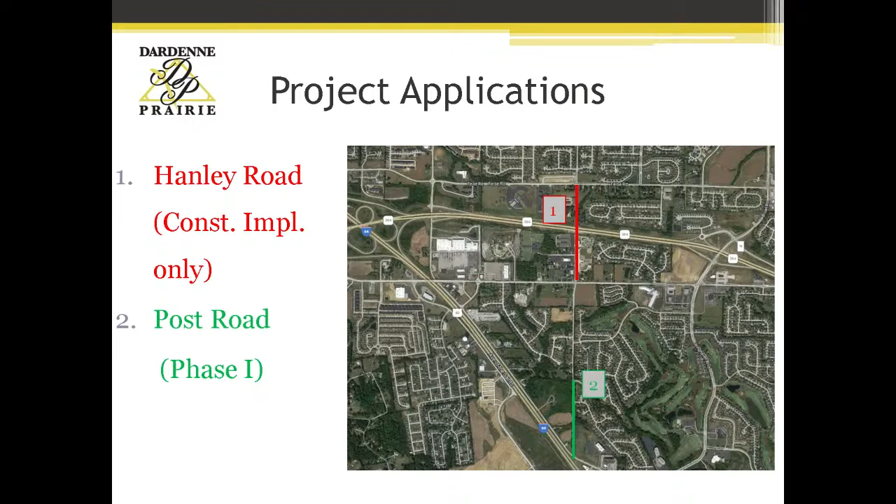Everybody hear me okay? So we submitted 2 applications: Hanley Road, just for construction implementation only, as suggested by the road board staff, county staff, and Post Road. Hanley Road is worn out. We're asking to do a mill and overlay restriping, and we're asking for construction money only.

The city's been authorized by St. Charles County to start the engineering, which is going to commence soon. It's right in front of City Hall. This stretch goes under the bridge there and crosses over or under 364.

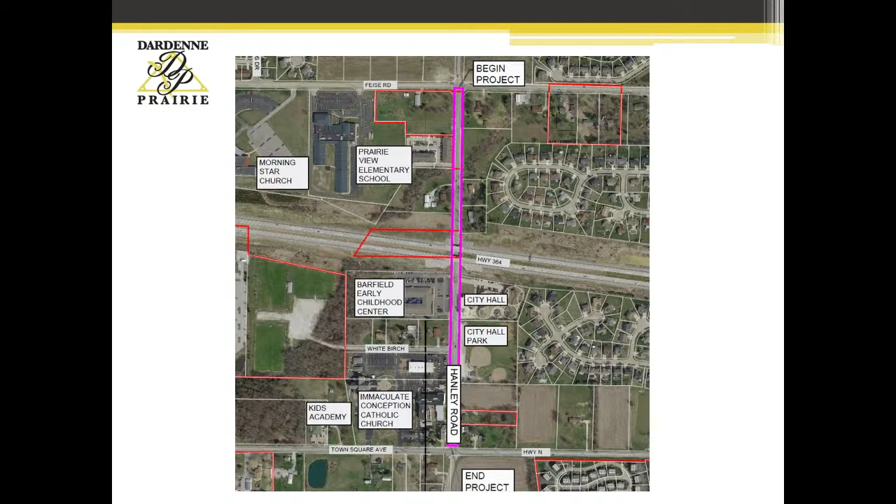I think it's busier than the ADT shows, but it's a very busy connection between Old Highway N, Town Square, and Feise Road, and many of you have traveled that area. It's very nice, but the condition of the pavement has deteriorated. We have City Hall Park, ICC Church, Wentzville School District Early Childhood Center, and Prairie View Elementary around the corner. So there's a lot of facilities, and it's a nice connection road. The condition, obviously, doesn't get better over time.

So we're here to share that with you. Again, mill overlay, we would plan on using fiber in most of our asphalt, which Weis Design Group has been using recently on our projects. It's been a proven quantity and it is holding up much better than standard asphalt. We believe it's well worth it.

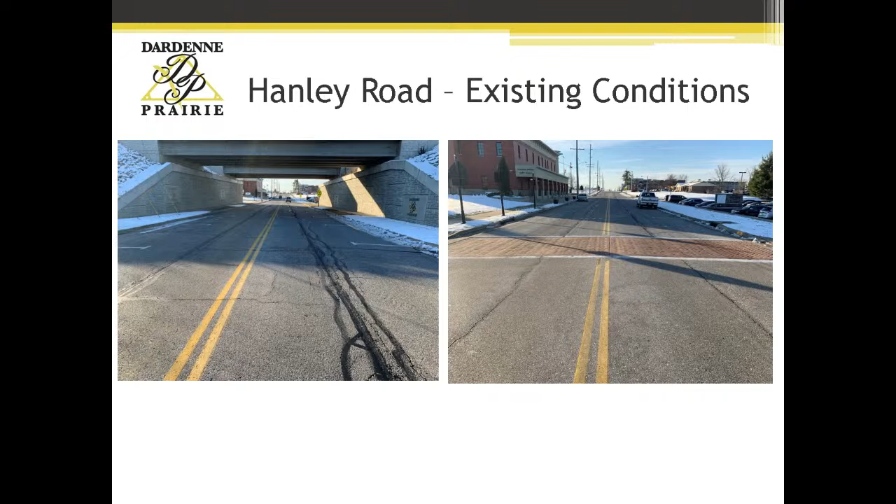So that was in the original grant that we applied for to East West Gateway for the construction funds. That would be part of this, hopefully to keep or prevent the cracks from coming back as quickly as possible. Obviously we can't control the base with the money we're asking for construction, but we can certainly help with control of cracking with the surface.

Share the road signs, try to upgrade that. The concrete is not damaged very much. We want to catch it before it gets to that point.

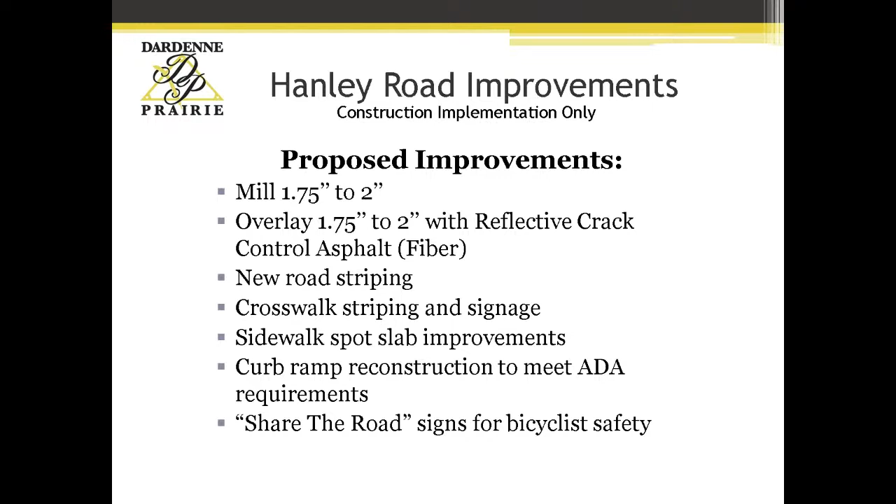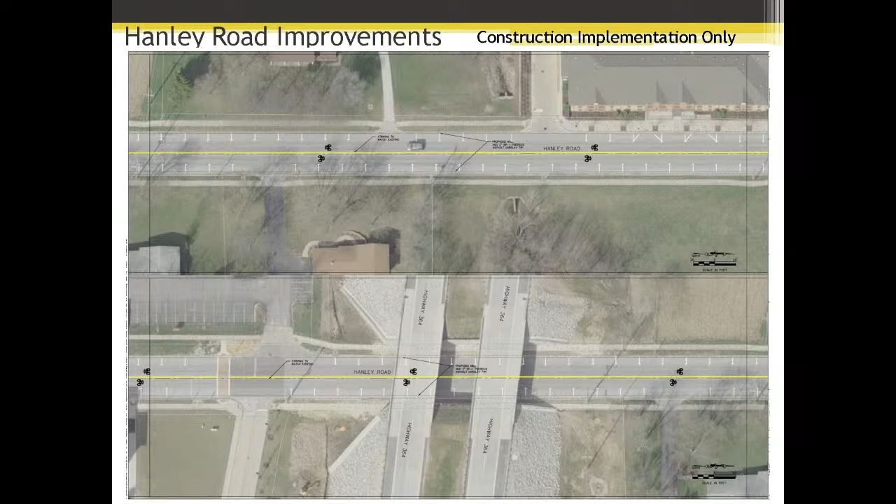ADA accessibility has already been built into the project under previous construction. So again, it's a mill and overlay, restriping, and basically reestablishing, putting some bike markings on there, and reestablishing good pavement. To the north, we have New Hanley Road that has been constructed and recently completed with STP and road board money. So now we will have a good connection from north of Feise all the way down to Town Square.

In this case, I have before the council tonight - I leave here and go to the Dardenne Prairie City meeting - and we're going to discuss and get approval, at least a consensus approval, to change from... because we were not awarded the federal grant, working with county staff we've amended the request to show there is no federal participation in this, and that the city now is going to have to increase their match, quite a bit actually, up to 20%. I expect a positive result from the council tonight.

But obviously we'll share that with staff as of tomorrow morning. And then from there, based on your decision, if you allow us to proceed under this manner, I'm sure there'll be a formal agreement that will be voted on by the city board.

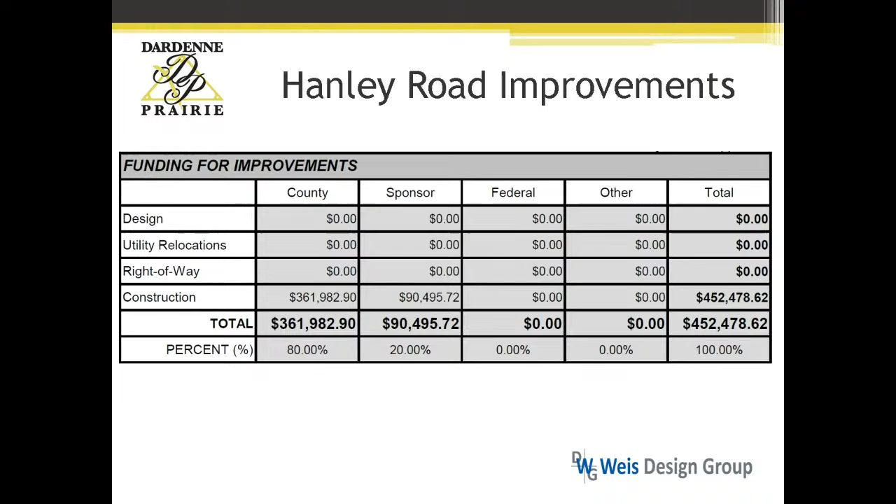Post Road - quite a bit more of a problem. Many of you, I'm sure, have driven this connection.

Last year we asked for the whole amount. This year, and we were tentatively awarded based on East West Gateway approval, the first phase - basically halfway, just short of halfway, to the second Post Valley entrance.

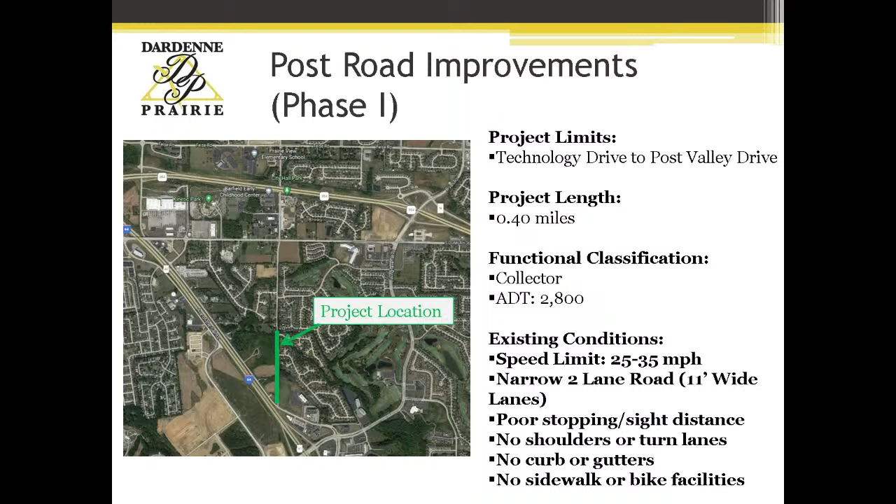Keep in mind, this road - the residents on the right side of where the project location arrow is are City of O'Fallon residents. So the city is sponsoring this on behalf of Dardenne Prairie to help with this connection, a major connection. As of right now, we don't have participation from the City of O'Fallon, even though the eastern half of the road is their primary residence.

And it's the old style - no curb and gutter, no shoulders, no stormwater control, no bike pedestrian movement, some sight distance issues. That sight distance you see on the right will not be taken up until we get to phase 2, but this does show kind of the northern end of the project.

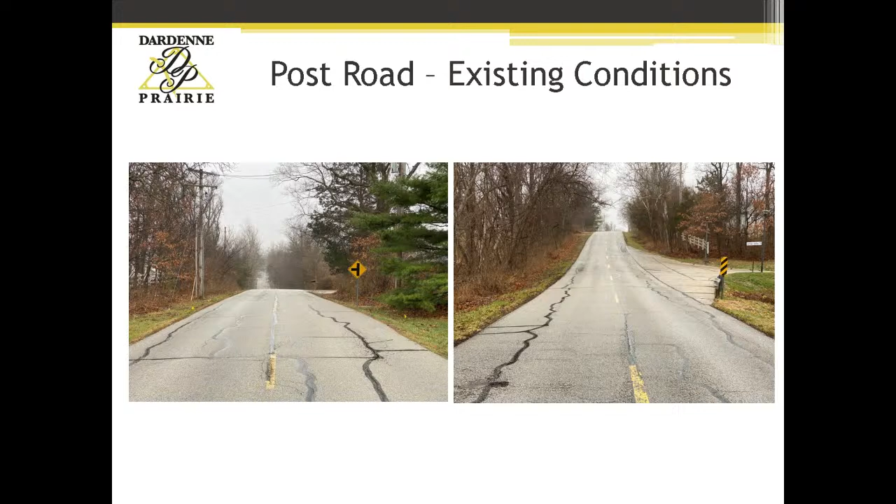The other big thing that we have is down at the bottom, you'll see a realigned intersection with Technology Drive. So we've submitted to MoDOT on behalf of the city, and they wrote a letter of support of the grant.

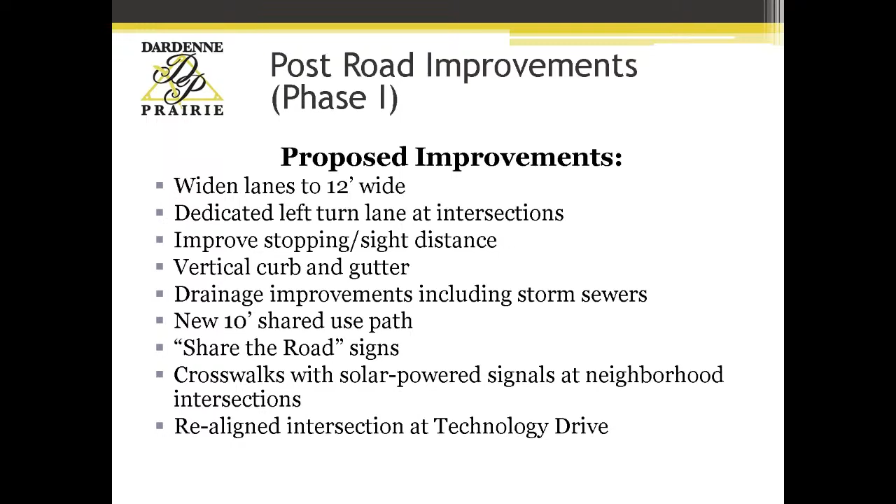We have a less than ideal turning movement, so if you're sitting on Post Road trying to get onto Technology, you're straining in both directions and basically looking behind you to see if cars are coming on Technology heading towards Bryan Road. I use it almost every day that I go to city meetings and daily to Dardenne Prairie because I live in Weldon Spring. It is very dangerous. So part of this project, the first phase, is to improve that.

And here's what I'm talking about. The existing road on the top part of this slide - Post Road comes in at probably about a 45-degree angle with Technology. Obviously, we're going to come in at a 90.

That requires, and we put some money in there for right-of-way. You never know exactly how much, but we took a hard look at how much we're going to have to acquire on this triangle to get this sweeping curve to realign with Post Road. So this is integral. Theoretically, MoDOT has looked at this.

Again, as you all know, these are concept plans. They are with thought. However, this alignment will be subject to approval because Technology Drive is a MoDOT road. But we have been in cooperation, and they support the project.

But this is a key component. And then, of course, running down, there's a new development being proposed as we speak on that corner, on the west side of that corner. A mixed-use type development, and so we've already asked them for their right-of-way of their portion, but their property really

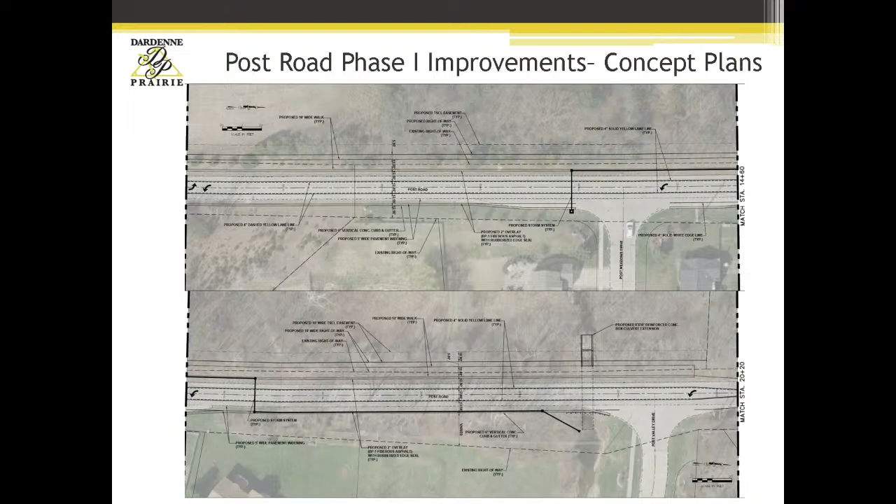But again, this is a key component of the first phase of this project. And we did line out storm sewers. We do have on the west side a 10-foot wide trail dedicated along the whole west side. In order to build that, we have an extension of a box culvert, which is, I guess there's a pointer on here, but if you can see that, it's

an extension of the box culvert in order to get everything, the lanes built and then the trail. And again, that's our stopping point. Where you saw that previous picture, where it starts to go up the hill, we'll have a temporary transition until phase 2 comes about. So that is our northern project limits.

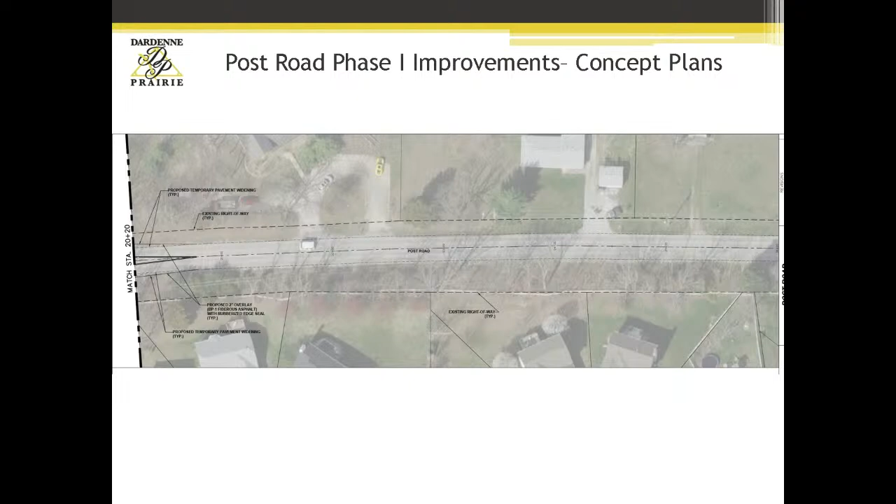This is the breakdown of the cost. Obviously, this project was on the list of approved or listed projects. So the federal share is involved. We asked for the most federal share that we felt where we would still be able to get the project started. This project is really a critical project for the area. There's a lot of danger in that curve, and it's another good connection.

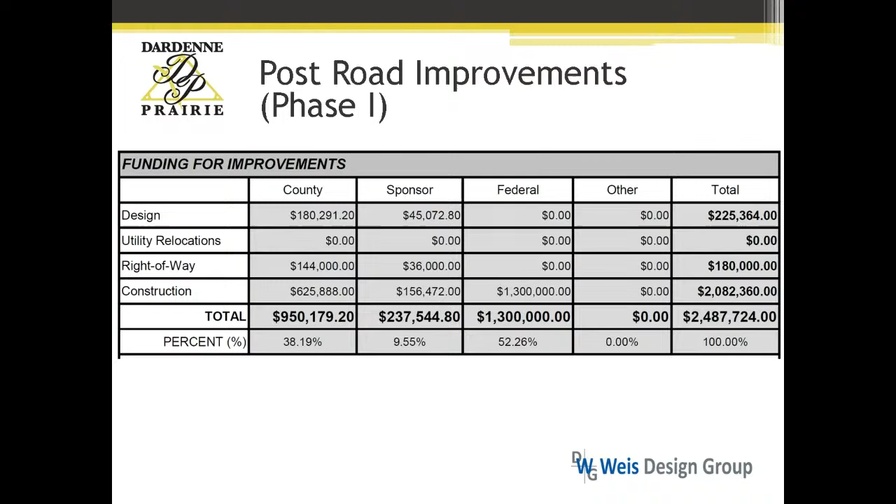Maybe alleviates some traffic off of Bryan Road, et cetera. So there's the share breakdown. And we were able to score good points because of this breakdown, and made the city understand that they were going to have to kick in more on this as well.

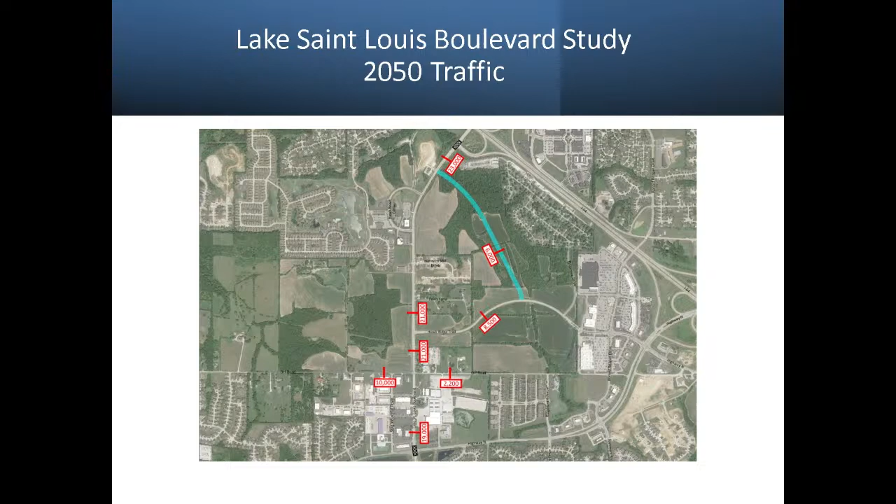We had a study done 2 years ago. They came back with a 2050 ADT of roughly 21,000 to 23,000 down Lake St. Louis Boulevard. And this is with a future connector. The green line is a future Hawk Ridge Trail extension. They suggested signals at these locations, possibly at the 2050 build out.

Initially probably would be the one at Fremont Road, which is the far north one, and then Orf Road at the farthest south.

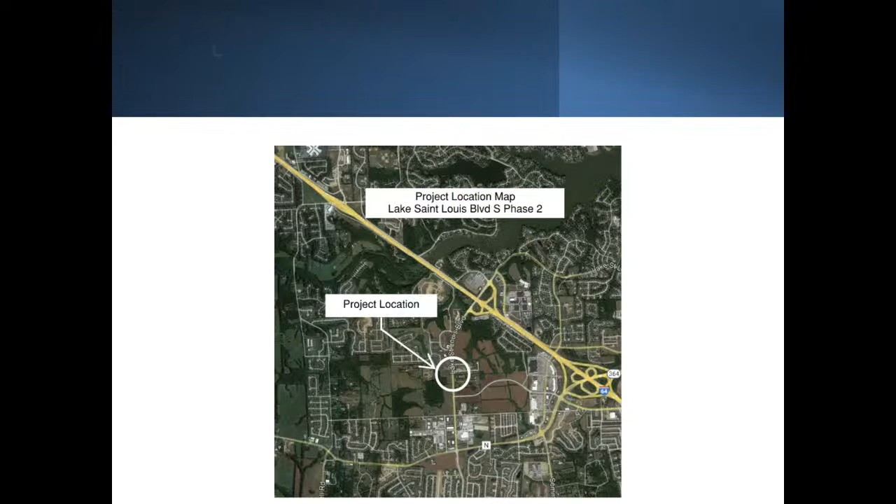Here's the project location for Phase 2. It's basically about a half mile of roadway. Last year, we applied for Phase 1, which goes from the highway to where this one starts. We were approved for both county and federal funding and MoDOT cost share on that project.

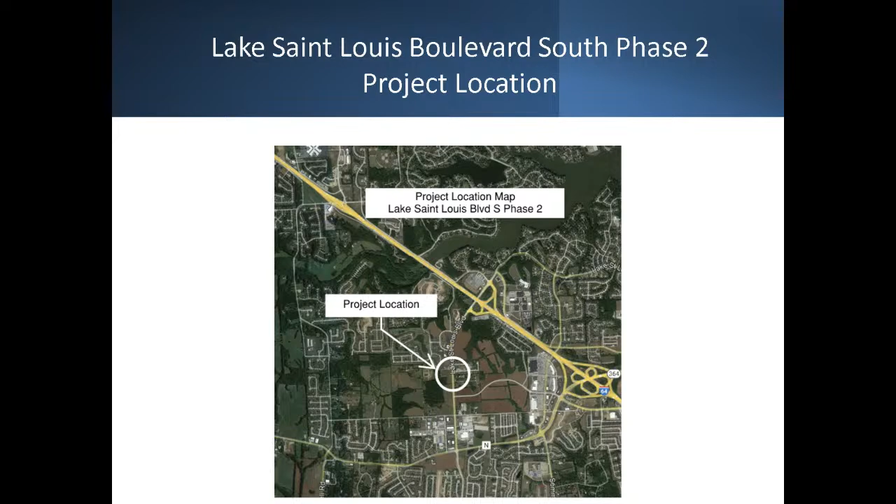So this is a continuation of that project. This is Phase 2. Phase 3 will take off at the bottom of the circle there and continue down pretty close to Highway N, where we'll have to figure out how to tie into the county's project probably when Highway N is upgraded.

The project's proposing adding, it's basically right now a 3-lane roadway, so 2 lanes with a center lane. The project's preserving a 5-lane ultimate corridor, providing bicycle and pedestrian facilities. That'd be a 6-foot sidewalk on the west side and a 10-foot bicycle facility on the east side, and then adding medians for traffic calming, and the speed through there is pretty high.

It's pretty wide open. The bike and pedestrian facilities will be placed at the point of the 5-lane build out, so they won't have to be reconstructed in the future. And the storm sewers will be built, I'll show you on the next phase kind of, but so that they can just be connected onto and extended out when the next 2 lanes come in the future.

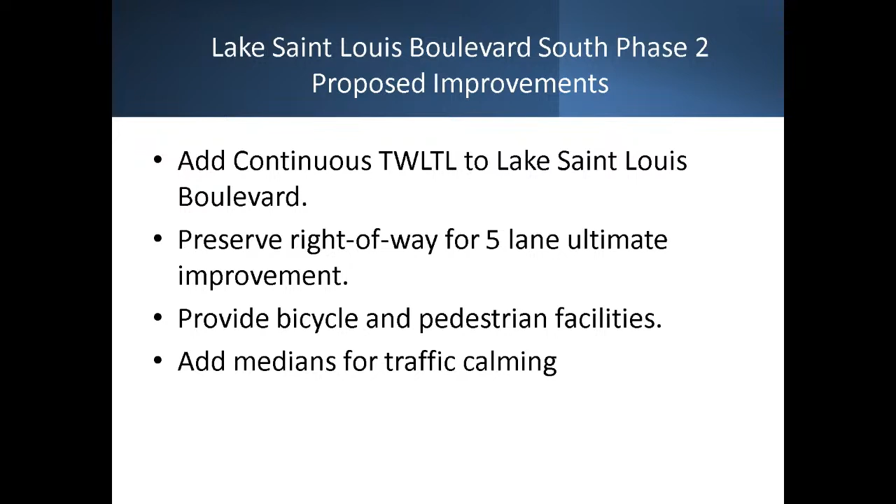Here's the beginning of the project. I can show you the 3 lanes, the 6-foot bike path on one side, the 10-foot on the other, continuing down. I've got green in the medians. Those locations are obviously dependent on the design engineer and need to facilitate access management.

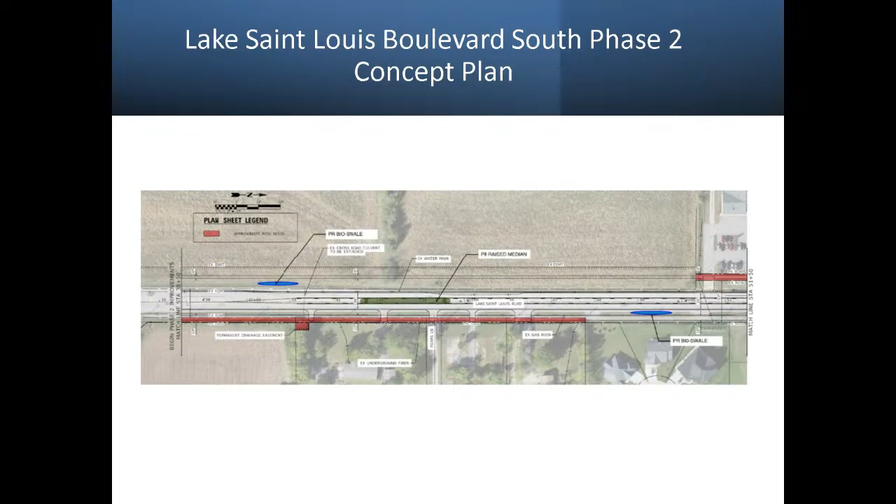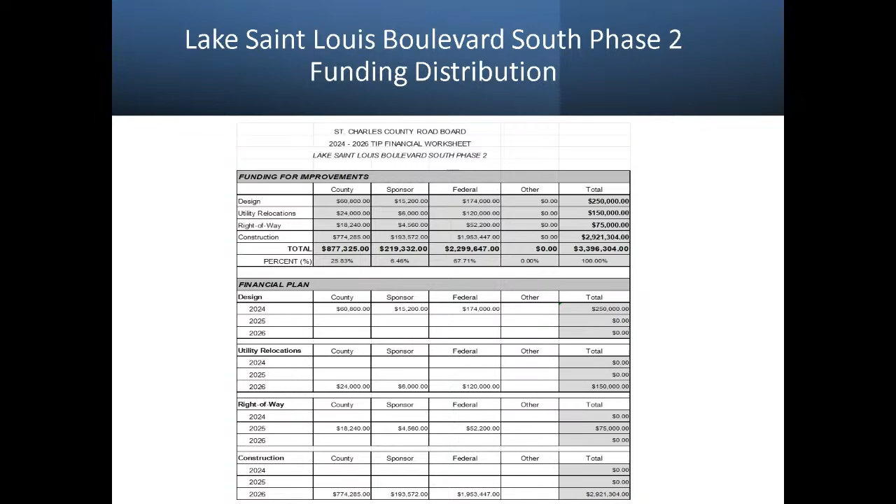Total cost for the project is approximately $3.4 million. We received $2.3 million in STP funding, or recommended funding. We requested $877,000 for the county road board and $220,000 for the city match portion. The breakdown is here with the years, which I covered in the last slide. Obviously the years will be dependent on the federal schedule, so they'll vary a little bit because of that.

The second project is the Orf Road Connector design, and the project location, you can see it there, is off between Hawk Ridge Trail and Orf Road.

I put this slide back on to show another piece of information. The bottom green line going left to right, that's Orf Road. It currently ends just to the right side of the bottom signal there. There's a line that goes up and then curves up, so it ends down there past the last development on your right. It's dead-ended, got dead-ended when they put Dierbergs in.

Part of this study suggested that the way this works with the traffic signal and the optimum traffic signal location is we needed to put in one of these connectors off of Orf Road, the bottom line left to right. The first line, which I believe is F, goes straight up, but we can't do that one because there's already development there. We can do one farther to the right, which is what I'm asking for here.

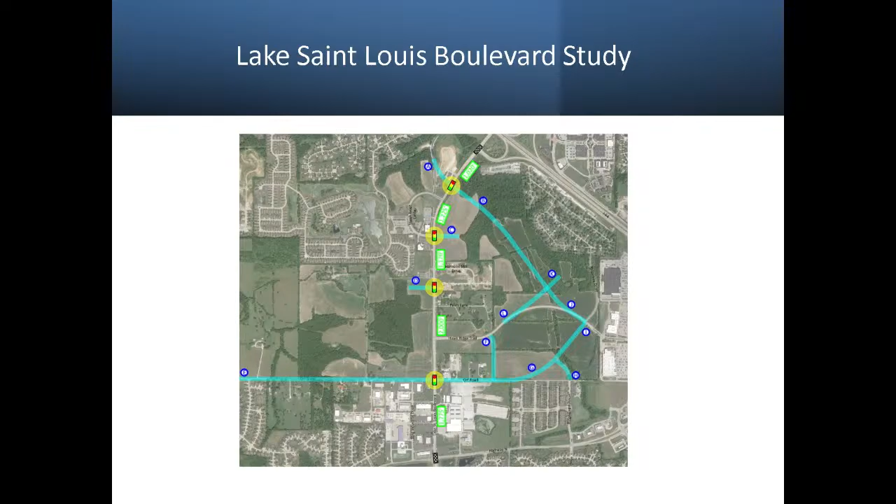So Orf Road, again, the bottom road is Orf Road. Here's what we're calling right now the Orf Road connector. We're just asking for the design funds on it right now, so we can apply for an application either next year or the year after. We can go ahead and start acquiring that right away.

I think this is getting ready to develop. We've had some interest in it. Everything to the west of this, to your left, has been developed. This is the only piece left between here and the shops. The only way we can get this in there actually makes sense really well, connecting Orf Road, and then to the south into Ridgeway Avenue, which then goes to Highway N.

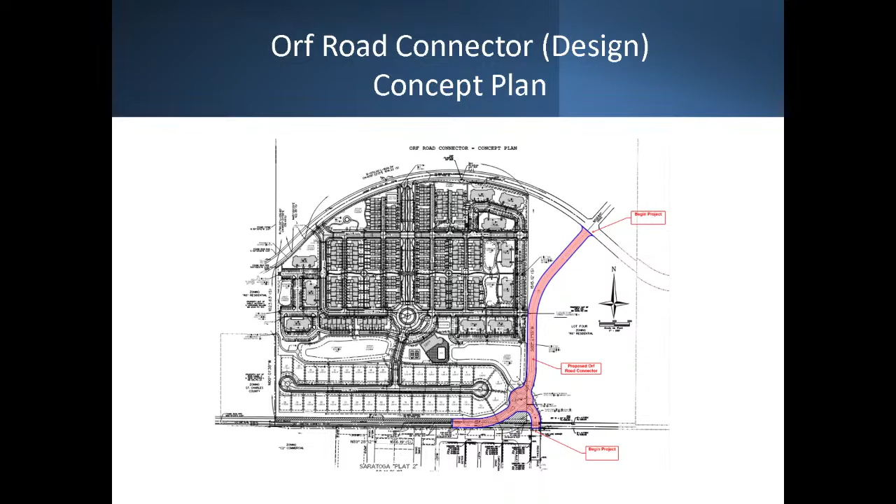Again, a little bit of a bigger picture here. The green line going up and to the left is the future Hawk Ridge extension, which is what we see being built out when that develops. The Orf Road connector, again, with the roundabout down here to tie Orf and the existing Orf Road together with a signal at Orf and Lake St. Louis Boulevard at the bottom left. That continues on Orf down to Duello Road.

I have to apply for a functional reclassification on this because the area in blue, the existing road, lost its classification when it was dead-ended. A new road doesn't have a classification, so I'm applying for this road to be converted to major collector status.

And so I'm doing that now. I've been on the phone with them. Actually, we think we're going to reduce Hawk Ridge Trail from a major to a minor collector, and make this the major collector, which will help us on future funding projects with the feds. So it increases our scoring a little bit, and it makes sense because this is going to be the next corridor.

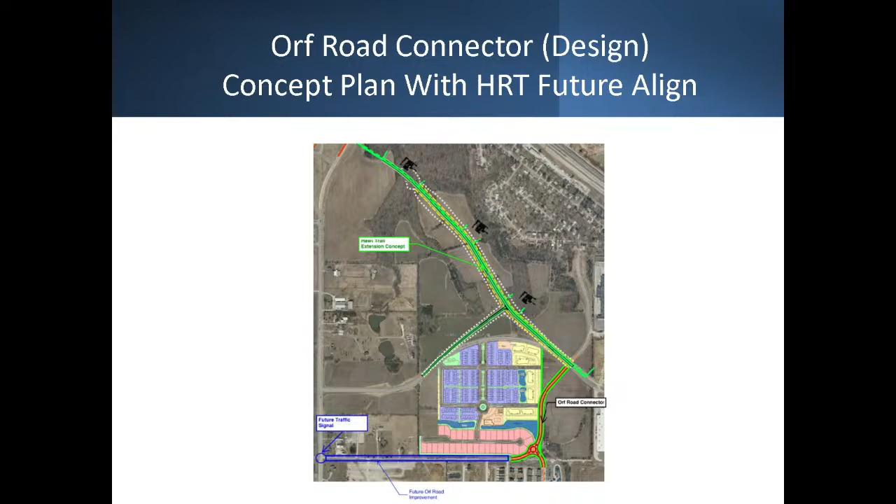So I'm reclassifying that, and planning on doing the Orf Road connector. Then we would phase in replacing Orf Road to Lake St. Louis Boulevard, and then working on it - it's probably going to be a two-stage phase project between Lake St., Louis Boulevard and Orf Road, or Duello Road, to improve Orf Road.

Design costs $200,000 to design the Orf Road connector. We were asking for an 80-20 split on that.

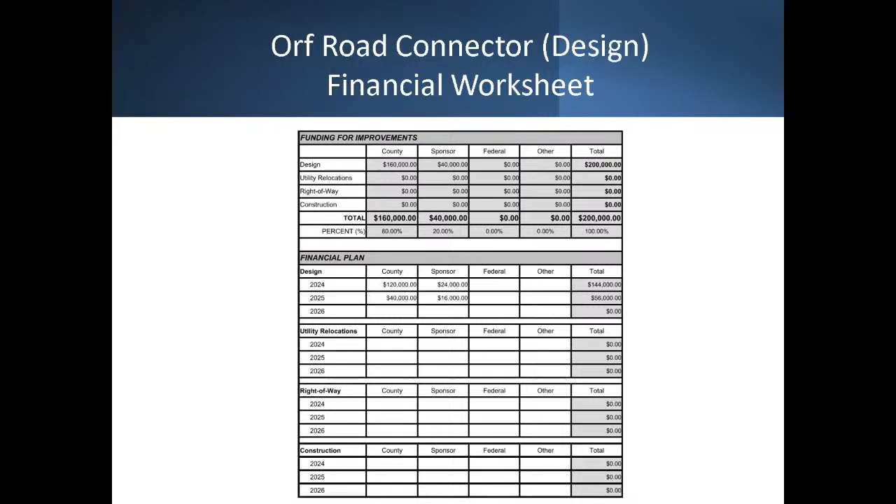That's what I have. Any questions?

The big thing on the design is the time frame. We're trying to keep things moving because Orf Road is getting busier. There's a lot of development going on down there, so we need to get on that corridor, because it's going to be at least a 4-year cycle of projects to be fundable.

Any questions? Thank you very much.

Move on to the City of New Melle.

Good afternoon, thank you for taking the time to listen to my project here. My name is Nathan Burley, I'm on behalf of the City of New Melle. We have one project we're presenting this afternoon.

It is the Foristell Road improvements. I'll explain throughout the slides why it says no trail there - we'll get to that. First, the project limits: we're going to start just a little northwest of the Veterans Foreign Wars property, and then go all the way to Foristell Road, or I'm sorry, Highway Z, approximately just a little over a mile.

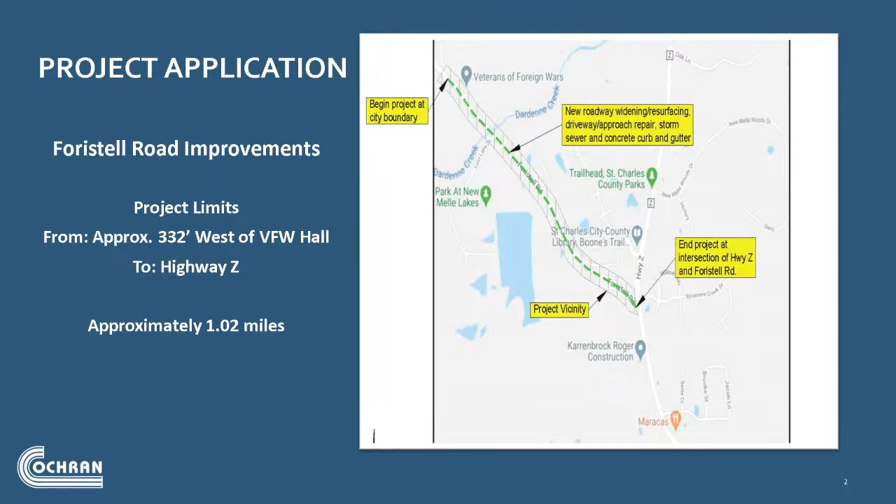So existing conditions of this road are pretty bad. There is very eroded and poor drainage on the side of the roadways. There are currently no shoulders of any kind except for a little stretch by a bridge crossing further down this road. Now there are no sidewalks.

However, we were able to obtain funding from East West Gateway recently for a 10-foot wide trail, which is why, after working with them and the county staff, we got to split these projects up to help us along. This would just be the second phase of it, sort of thing. So we're just presenting the roadway itself this time. The Paser rating is 3.25, so very, very bad condition here.

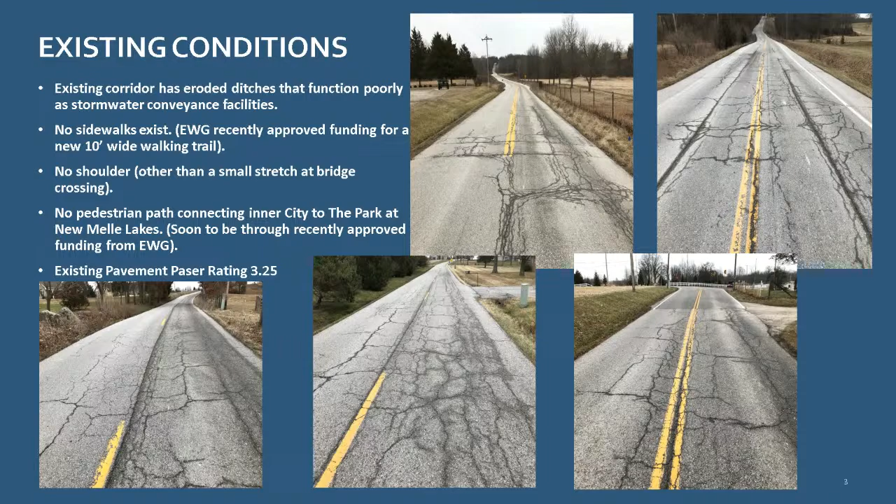Breaking this up into sections of improvements, we're starting by the VFW hall. We're going to pick up at the city boundary and resurface the road with asphalt, add some 2.5-foot wide curb and gutters through there, add a shoulder as well, and incorporate new storm pipes for any driveway crossings.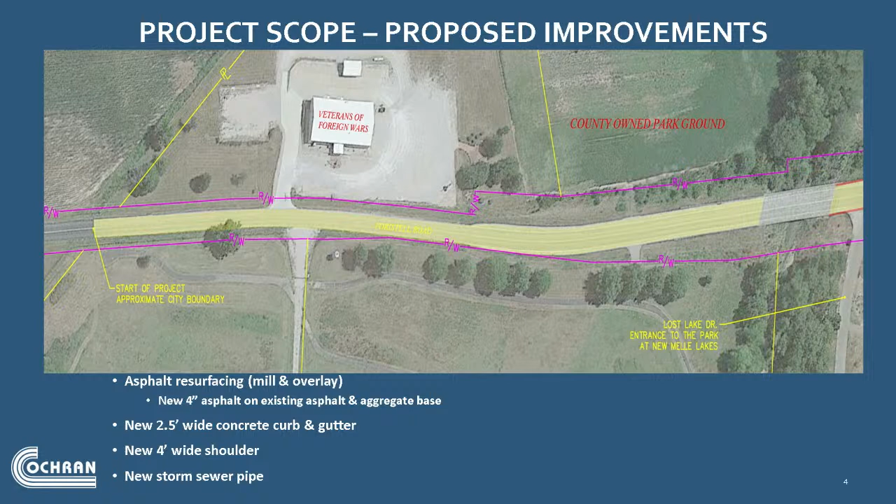Moving further up is more of the same, so we're going to widen the road out to make it uniform. I have typical sections coming up. Right now the existing lane widths are all over the place, so we want to make that uniform and get a good shoulder in there and some curb and gutter to help the water drainage, also incorporating new driveway approaches as needed, along with storm culverts that go underneath it.

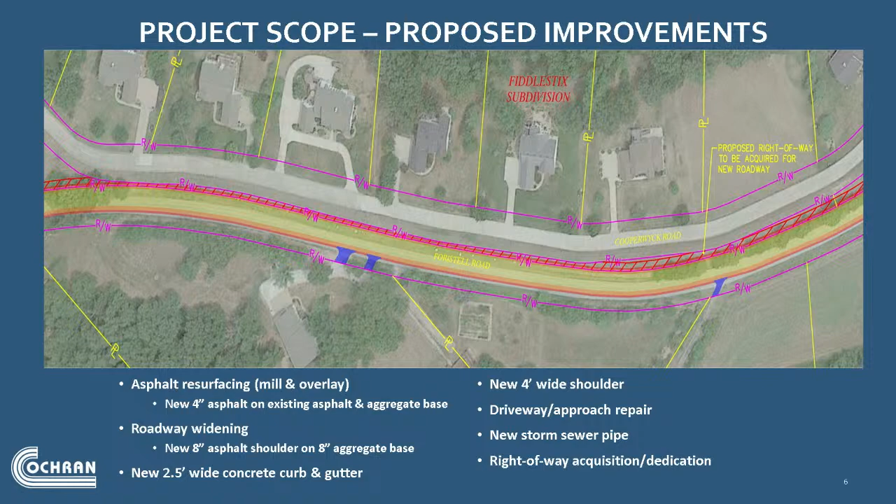Moving further along, we get close to the Fiddlestix subdivision, so there is some right-of-way dedication we will need to obtain in order to get this corridor through in a uniform manner. Again, we're widening the roadway and doing asphalt resurfacing, mill and overlay, and curb and gutter. Finally reaching Highway Z, it's more of the same: widening the road, curb and gutter, driveway approaches, things of that nature.

This is the typical sections. As you can see on the left, that's the existing conditions - roughly 11-foot wide lanes that vary all over the place. There is no shoulder, and the ditches are very eroded, causing poor drainage.

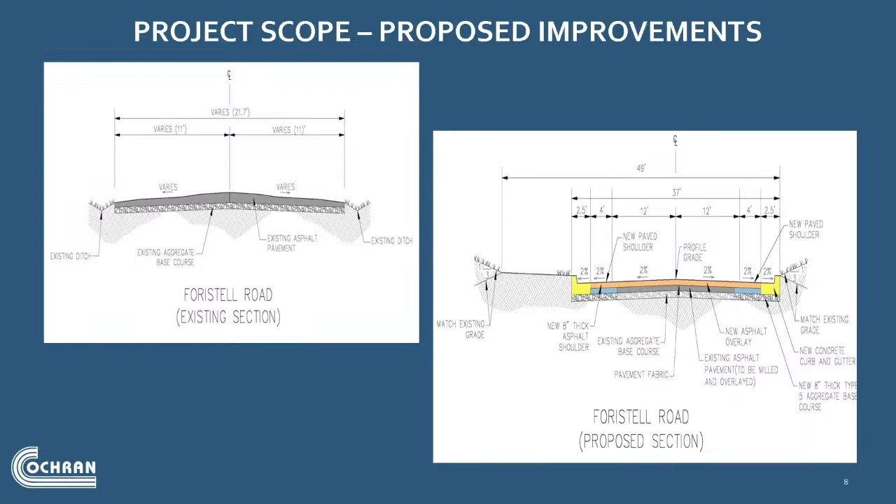On the right is our proposed design. We want to make them uniform 12-foot lanes all the way through and have some roadway separation between vehicles and pedestrians with a 4-foot wide shoulder and protection with a 2.5-foot wide curb and gutter. On the left here there's a big space - that's where the new proposed trail is going to go, right up against the back of the curb and gutter, but that's a separate project.

So performance measures here. Existing conditions is on the left there. Now at the bottom here, this is the overall goal, what the city is after, how they want it to look. This is actually from Weldon Spring. We did a project for them, similar to what we're trying to do for New Melle here.

The 10-foot wide trail was already approved, and then they're after the roadway there, how that looks with the 12-foot lanes, 4-foot shoulder, and the 2.5-foot curb and gutter. Really, they're after just healthier living and all-inclusive connectivity to the inner city and the county park that's actually at the end of Foristell Road here.

And they want just separation between motorists and pedestrians. Unfortunately, Foristell Road is heavily traveled by dump trucks from the quarry, which makes it very dangerous for pedestrians trying to get down to the county park, because there is no shoulder, no way for them to avoid walking on the side of the road. So we're trying to rectify that and get that cleaned up, and also improve the stormwater runoff and erosion hazards presented there currently.

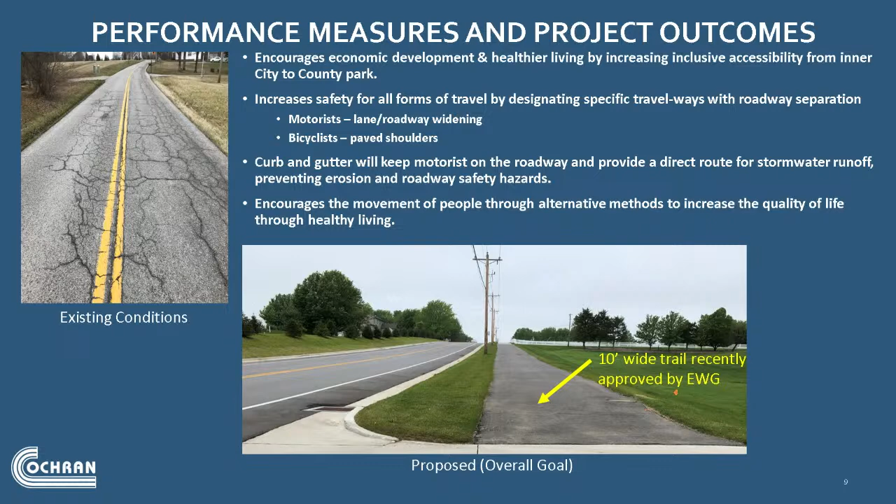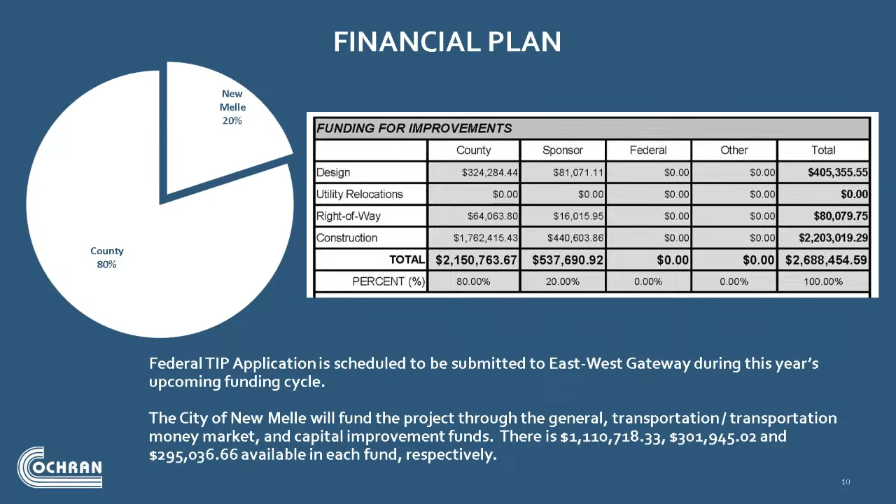For the financial plan, the cost breakdown is an 80-20 split. The overall project is a little over 2.6 million. So I'm requesting 2.1 million from the county, and the city will cover 537,000. For scheduling, we're set to start at the end of this year in October, with a completion date in March 2027 for construction.

So overall, we're looking for connectivity within the city and the park, and healthier living and safety overall. I appreciate your time. Do you guys have any questions?

Is the Parks Department going to develop the campground still? Yes, that is the plan. Do you have any timeline on that? No, I do not, not at this time.

Did you apply for federal funding for the road? We tried last round and did not receive it, so this round we are not. I know there's an upcoming one that opened at the end of April, so we're going to try for that.

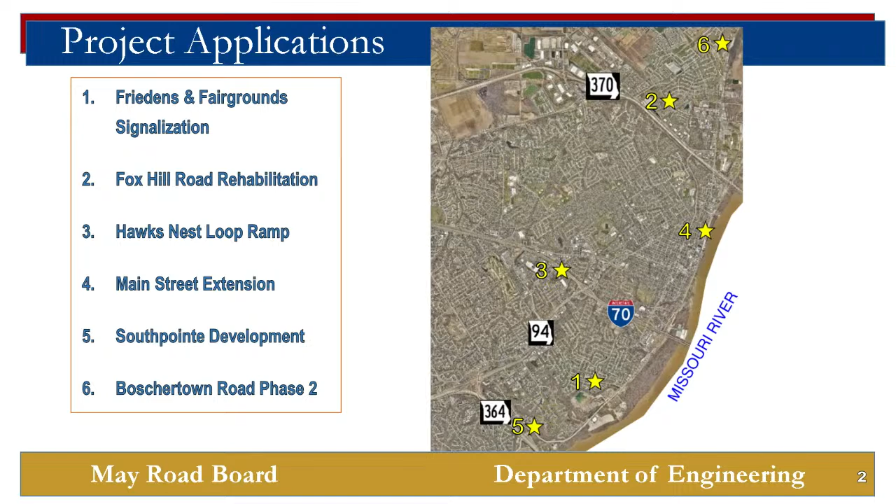The first project we wanted to talk about today is the one you heard a lot of speakers on. Before we get into the technical aspects, I wanted to take a step back and think about the guiding principles of the County Road Board. The projects we bring before you, the main goals are to support the state system and provide parallel routes to get folks efficiently between larger state routes within all the municipalities in St. Charles County, and in the process enhance development in all of our cities. Really, this project is the logical next step and result of us all doing a good job.

It's easy to look at this project and say, well, we connected Convention Center Boulevard, so now there's more traffic coming down the street, and that's definitely a huge part of it. But we're also rebuilding Highway 94 to get people more efficiently up near the Friedens Road end. We've reconstructed Arena Parkway, and we're in the process of designing and going to rebuild South Fifth Street. So there's all this successful road infrastructure supporting this increase in traffic, and unfortunately the increase in crashes corresponding to that, and also just a huge amount of development.

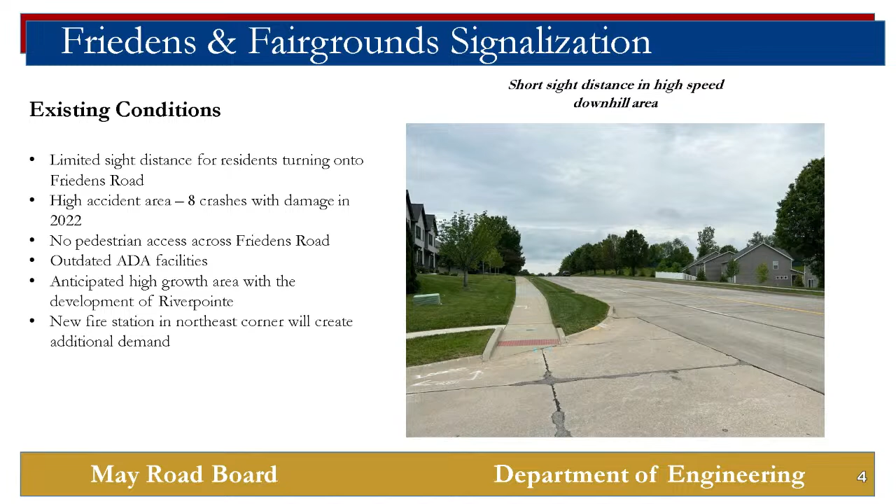So what's the solution for solving the issues you heard from several members of the public tonight? We think the solution is a signal. We've gone through the signal warrants, and it is a warranted signal based off of volumes and crashes experienced, and also the connectivity of the surrounding signal network.

One of the tricky things about this intersection is that it's a little harder than just adding traffic signals. It's a 4-lane road with no center turn lane today. So our first thought was to install a signal without touching the hardscape, but upon further consideration, we think there's significant risk of conflicting traffic movements if we leave a through and left turn lane combined.

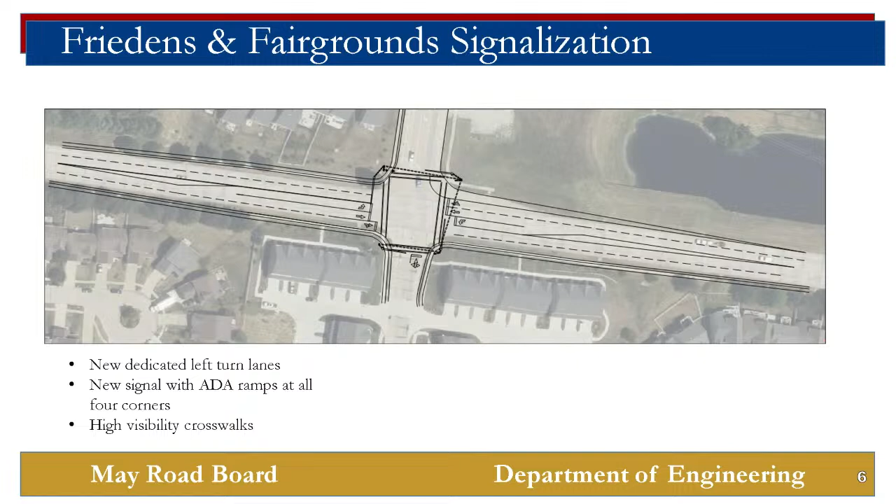What's the timeline on your fire station? It is scheduled to open the end of December of this year. There's actually a photo of it up here, of the construction underway. It's there.

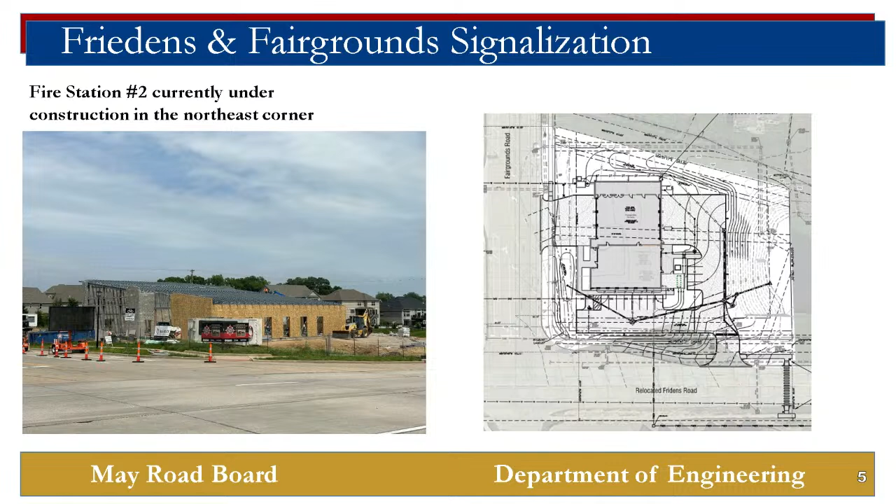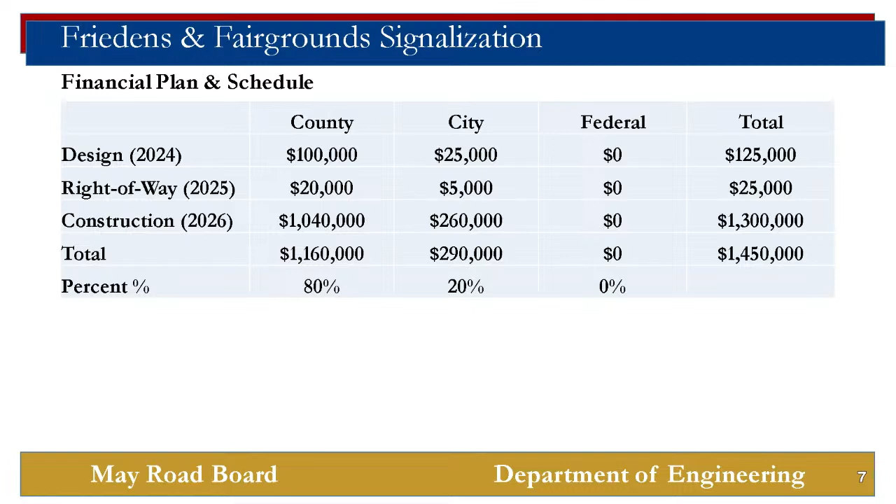As far as funding, this is a project we're requesting an 80-20 split in funding from the county, and we're estimating the entire project with the hardscape upgrades is going to be just under $1.5 million.

The next project we have before the County Road Board tonight is the Fox Hill Road rehabilitation project. This project will stretch from just short of Boschertown Road down to North Randolph Street, on the north end of town just north of Missouri Route 370. Fox Hill Road is one of our worst condition roads still left in the city that's not under design or construction to be replaced or rehabilitated, with a PCI ranging from 40 to 60.

I think our PASER rating was 4.25 out of 10. There's severe alligator cracking throughout, lots of rutting. It's kind of right on the sweet spot where we think we can still save it.

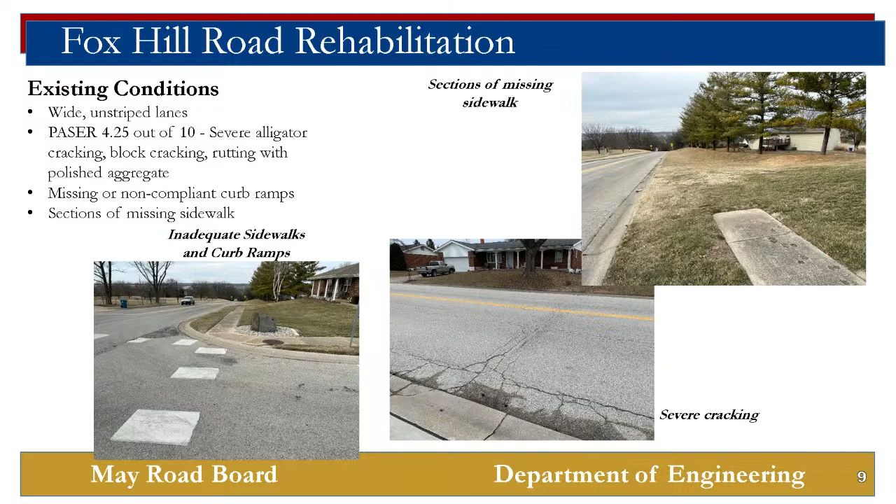We think we can save it with a mill and overlay, so that's what we're proposing to do here. We're proposing a mill and overlay of the entire roadway section, along with filling in missing gaps of sidewalk that are prevalent throughout the corridor.

In the course of the mill and overlay, we want to come back and restripe it a little differently than it is today. It's currently really wide, and there's very little parking on the road, which causes this big open pavement effect that has a lot of people speeding up and down the road.

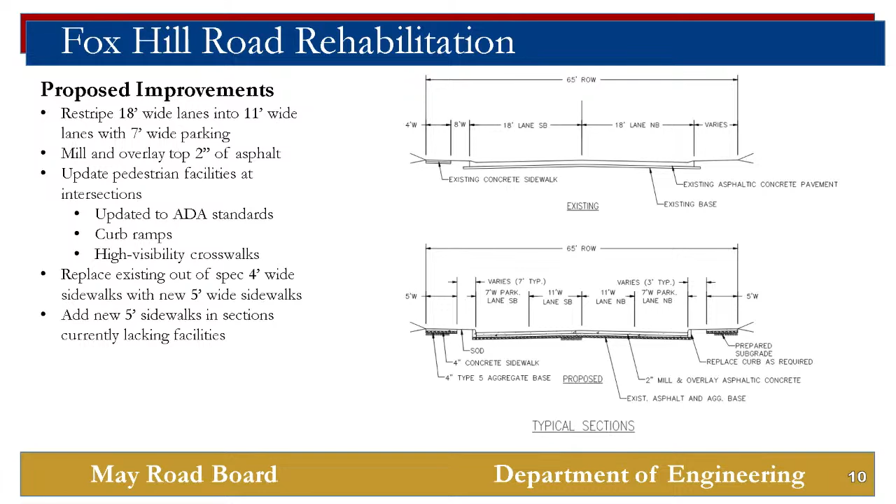We're going to propose adding some edge line striping to help drive those speeds down, and also give a little more buffer to pedestrians on the sidewalk or cyclists on the road. So we'll neck those lanes down to 11 feet and stripe that parking lane along the sides, filling in those gaps with 5-foot sidewalk.

This project is federally funded at 80% federal funds through this round's STP-S funding. We are requesting an 80-20 split on the remaining funds. The total project is right at $1 million.

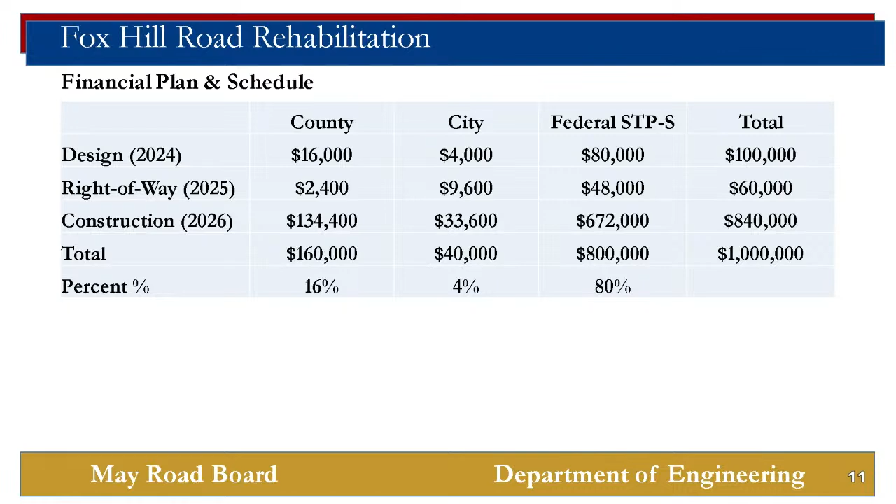The next project is the Hawks Nest Loop Ramp. This is a project that the city's been coordinating with the county as part of the I-70 outer road improvements. There's been a lot of changes throughout the design-build process with MoDOT, and looking at that, there's been some changes to the north outer road system and what the preferred concepts would be there.

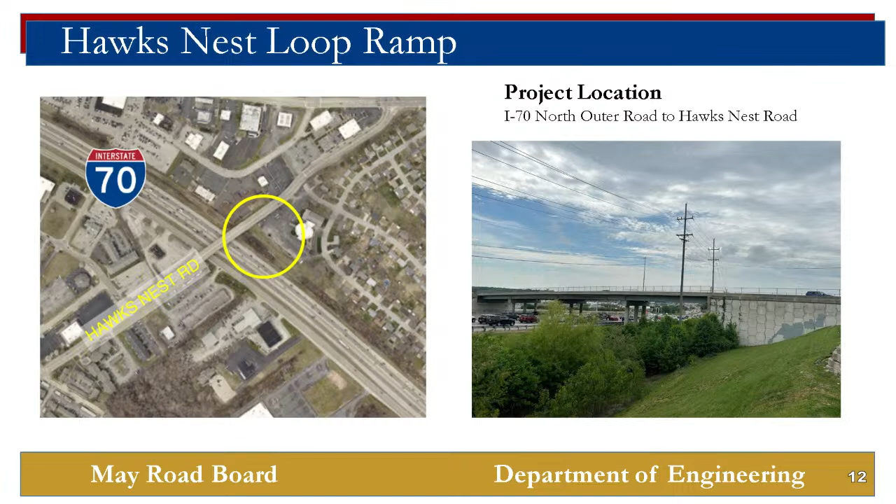This past round, Amanda's team applied for federal funding for the north outer road system. This project is kind of a connection to that — a connector road to that north outer road to provide connectivity up to Hawks Nest from that outer road system. It would be on the northeast corner of Hawks Nest Road and Interstate 70, coming up near the church on that quadrant of the overpass and providing connectivity from the outer road to Hawks Nest.

This project does have some difficulties to it that make it a little more costly. There's a significant grade difference between that north outer road and the Hawks Nest overpass that's going to necessitate the use of retaining walls. Part of the reason is that there's obviously not a big open field on that corner.

We're eating into a parking lot, so we're trying to keep that footprint really tight. There's limited and probably difficult right-of-way constraints there, along with some retaining walls that are going to be required, which make this a little more costly.

The total project to construct this loop ramp is just over $2.3 million, and the city is requesting an 80-20 split with the county.

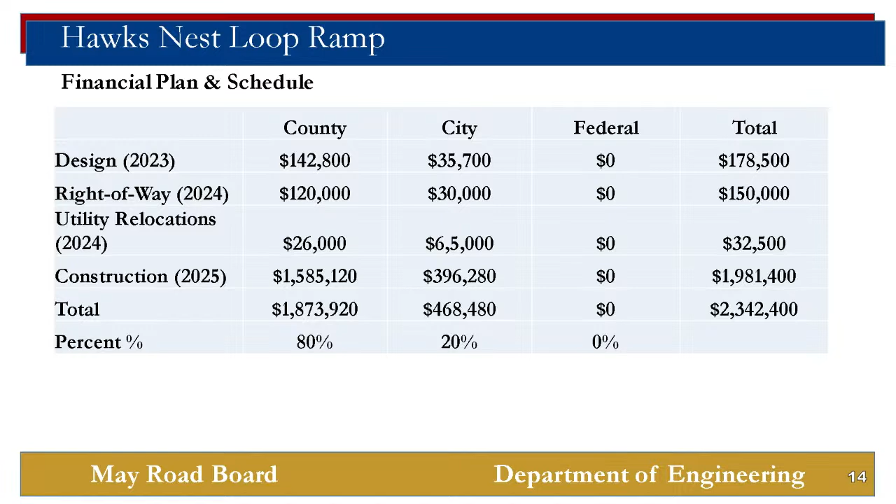The Main Street project is the Main Street extension project in the city, one that we've brought before you before, and it's one that's really important to the city.

The last time that we brought this project before you last year, the County Road Board agreed to participate in the funding of the design through the ACF facility to reestablish the grid network on the north end of St. Charles. Some really important things have happened and progressed since that time.

The city has moved forward with getting North Main Street functionally classified, which is a really big step to allow us to pursue federal funding. In the past, we have not been able to pursue federal funding because it was not on that functional classification route.

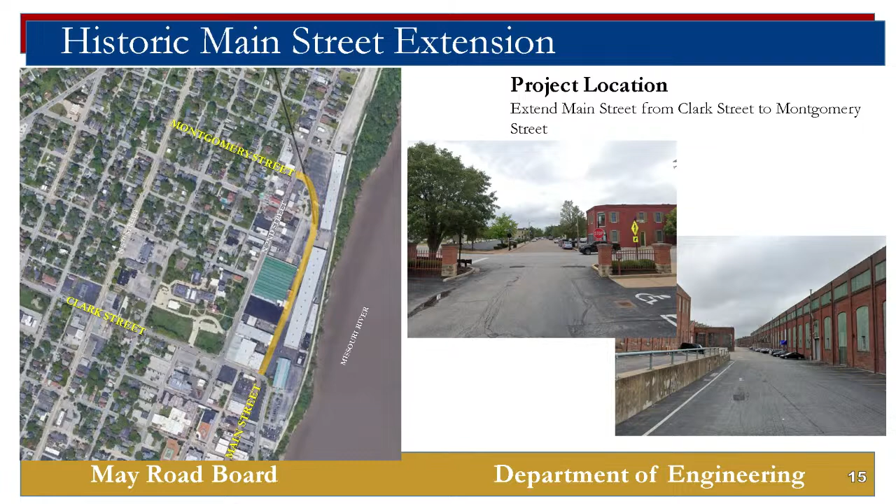This year, I'll give a quick refresher of what the project consists of. Just north of Clark Street, Main Street terminates into the ACF facility. This project would extend Main Street through the narrow corridor, through the American Car and Foundry property, and tie in to North 2nd Street near Montgomery Street, as well as reestablishing some of the cross-street connections along the way.

It's designed to be a really walkable corridor, but also provide some on-street parking and other things to activate this area to allow for the redevelopment.

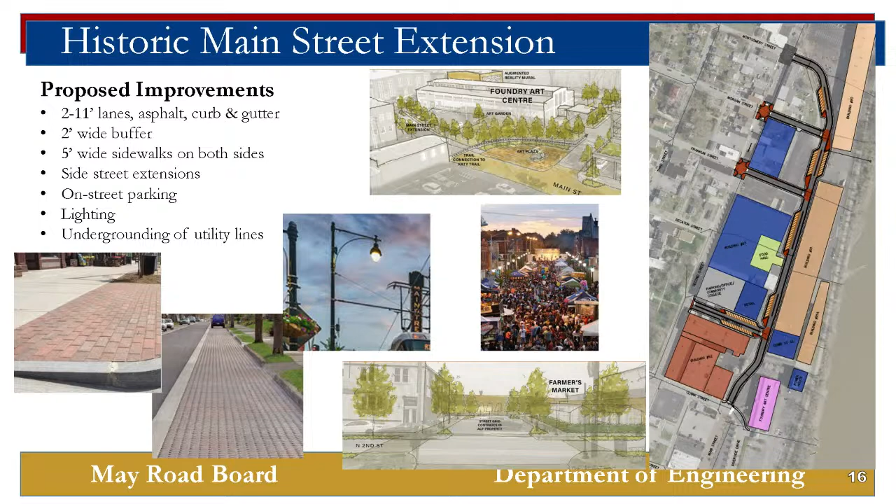The city applied this year for federal STP funding for this project, and unfortunately we were not successful on the federal application this year. But we received some early feedback from East West Gateway, and their thought was that it's a really good fit for the federal TAP program, which is open now, and we're working on an application to submit in July.

So this project funding sheet is probably a little different than the ones in your binders this afternoon, kind of modified to fit that new idea and pursuit the city's planning to chase. I'll point out that none of the city utilities or undergrounding is being requested for County Road Board funds. There are some standard utility relocations and right of way we're requesting funding for, but all those decorative type items we're not requesting matching funds for.

The total project is a really large one for us, estimated at $8 million. We're requesting a total of 44% reimbursement from the county, with the city participating in almost 25%, and our federal TAP application will request the maximum $2.5 million, which works out to 31%.

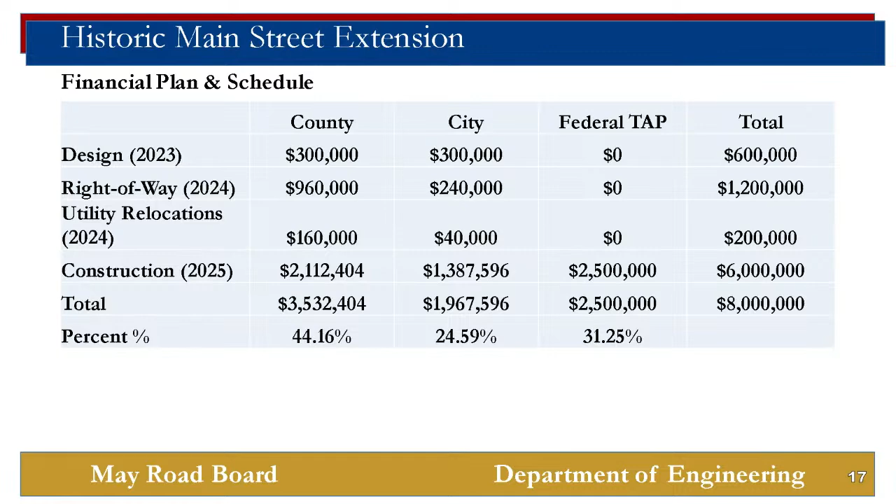But I guess the main takeaway for this project is that our conversations with developers show they want to see progress, they want to see this project moving forward before they jump in with both feet. Your point's well taken -- typically if there was a developer, they wouldn't be withholding right away, they'd want to see it go forward, so in addition to maybe the federal, you'd have a developer column there too, and instead of 44%, maybe it's less than that. I appreciate you listening. Yeah, absolutely.

The final new project we'll talk about tonight is the Southpointe Development. This is an interesting one, I had some learning as this development kicked off and we started to wrap our heads around it. Back in 2009, as part of the Page extension being built out, the county and city worked on several studies to try to master plan what these areas around 364 could or should look like.

In 2009 there was a study commission that looked at this corner in particular, called the Arena Parkway Page Planning District. It looked at all these large swaths of land and said these areas are very developable, but what are the challenges we're going to face, and what requirements and things should we make sure we do in order to develop these properly.

This corner in particular, and this screenshot here is directly out of that study, looked at Hemsath Road and said that offset T intersection combined with this new Page extension is not compatible. There's going to be too many conflicting traffic movements, and the access into and out of the site isn't going to work and isn't going to be safe. So they recommended the S that you see on the top of the screen, their legend for a proposed signalized access. So they thought at that time that we should realign Hemsath Road. I think in the study they maybe targeted the year 2020, so we're a few years late, but we do have a developer now that would like to develop this corner.

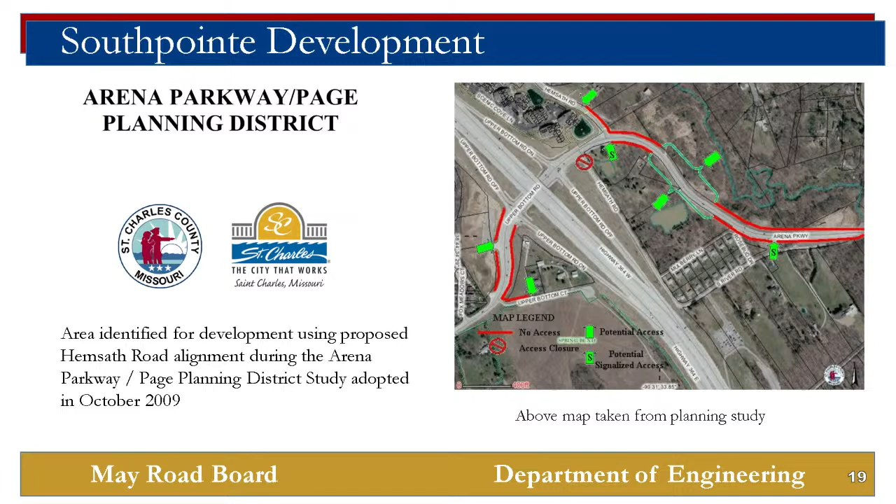This project would install new sidewalks, it would install a signal, and realign 1,000 feet of road at Hemsath.

This project does have private development participation in it, quite a lot actually. There's no request for any utilities, any right of way, anything else. The only request here is for construction dollars. The request is 44% participation from the county and 55% from the private developer. The total project cost is just under $2.9 million.

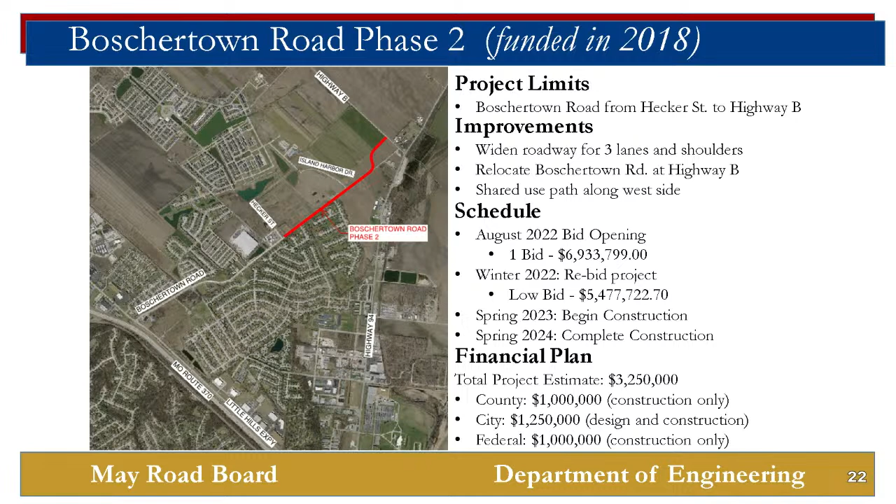Then our final project that we wanted to discuss was the project overage for Boschertown Road. This project has kind of a long history, but we originally brought this before the road board in 2018. So it's been a lot of years since we first anticipated doing this project. We have federal dollars in it, we have county road board dollars, but the economy's changed, inflation's kind of gone nuts. And we still see a huge benefit to doing this project. But when we first got bids, the first round of bids that came back was around $6.9 million. Just kind of insane inflation, and the city didn't have the ability to move forward with that project at that cost.

We had heard from contractors that we thought costs may come down if we waited and rebid the project. We waited just under a year. We did rebid the project, and that patience did pay off. The original bid was around 6.9 million. The second bid was just over $5.4 million. So there was significant savings in waiting and rebidding the project.

That total, $5.47 million, included some water work and some stormwater work that was associated with the roadway. But the city was able to identify stormwater funds to cover some of the overages to reduce our ask to you tonight. But there was still $844,000 in just plain straight roadway overages that we were looking at covering, and we're requesting a 50-50 split in those overages, which amounts to $422,000.

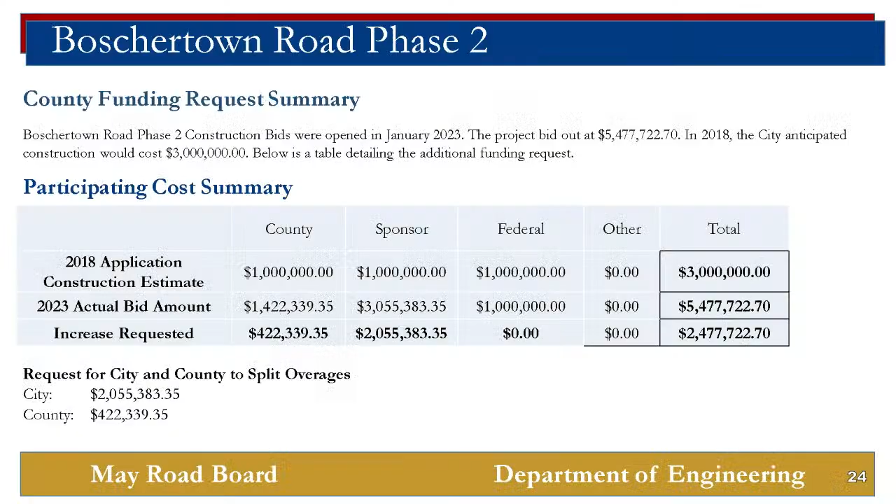Can you go back to Hemsath? Yes, sir. As far as the cost breakdown, any reason the city's not shouldering some of that, or just, I mean, normally there's just an 80-20 split or something like that. Yeah, I would say in this case, this is something that we've been working with the developer, and they're comfortable shouldering that cost. So we think that's appropriate. If they're willing to shoulder that cost, they would. Thank you. Yes, sir. If there's not any other questions, that's all I have for you this afternoon. Any questions? Thank you very much for the presentation. Thank you.

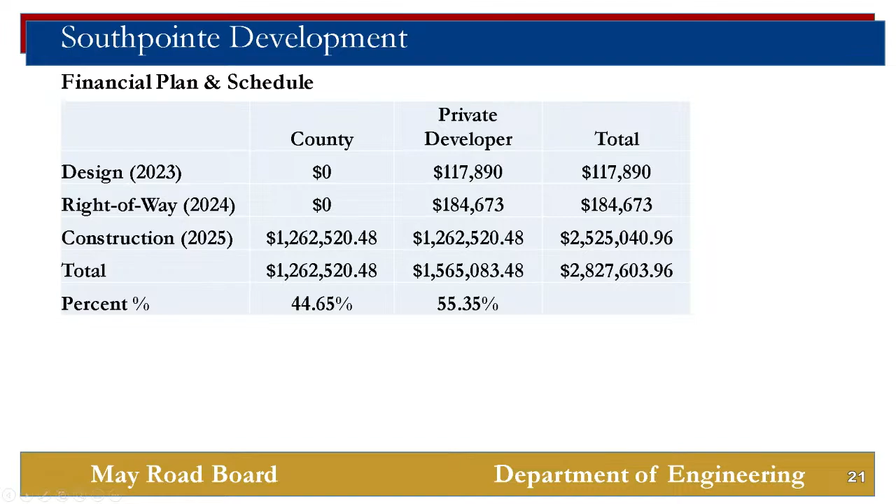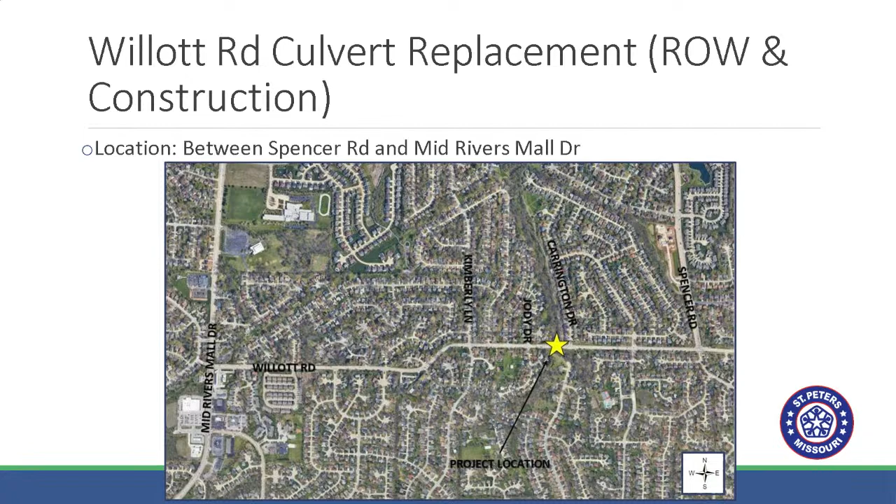Good evening. Amanda Rich with the City of St. Peters, here to present our projects for this round. We have 5 projects that we have applied for. First project, Willott Road culvert replacement. This is only for right-of-way and construction. We're already working through the design with the designer right now. The location is between Spencer Road and Mid-Rivers Mall Drive. Anybody that's driven it knows it goes basically from Mid-Rivers Mall Drive all the way to Jungermann. It's a very busy east-west route for the city, kind of a reliever for Mexico Road.

The existing condition is basically the concrete pipes are failing. Joints are separated, got a lot of infiltration. We've tried doing some patching over time, and we're just to the point where we need to replace it. Currently, there's not enough capacity in those pipes to handle the amount of water flowing through. There's two 72-inch RCP pipes, and the design is proposing to put in two 8-foot by 6-foot box culvert pipes.

So, project scope is to remove and replace. Remove that RCP and install some concrete box culverts. Remove and replace the concrete roadway above, the sidewalk above, and then repair some of the eroded creek bank slope. This project actually does extend further down the creek, but the scope of this is just for the area right there within the roadway right-of-way. Our stormwater folks would pick up the remaining portion further downstream.

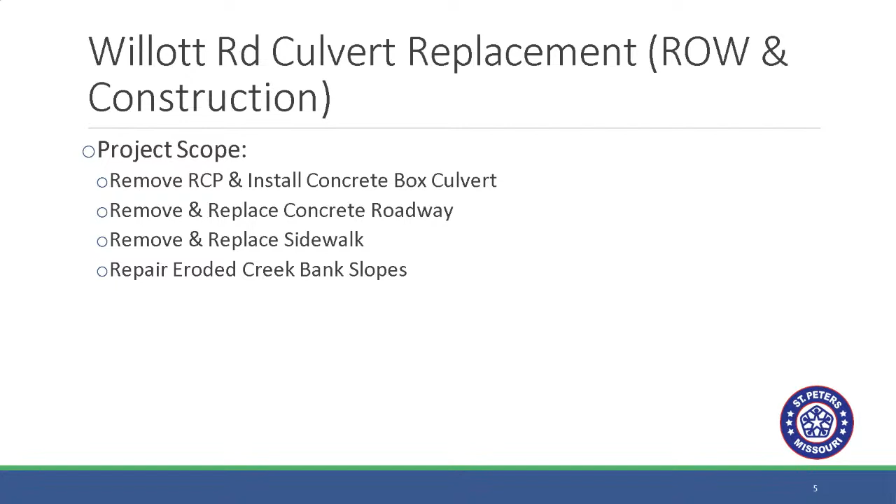So, again, performance measures: replace the failed RCP with box culvert, provide the appropriate capacity for the creek, stabilize the bank, and then with the project, a benefit is we'll provide a connection from the existing bike lane on Willott Road to the multi-use path on the north side of the roadway, kind of like a slip ramp to get on and off the sidewalk there. And then to provide, reestablish that ADA compliant pedestrian path on top.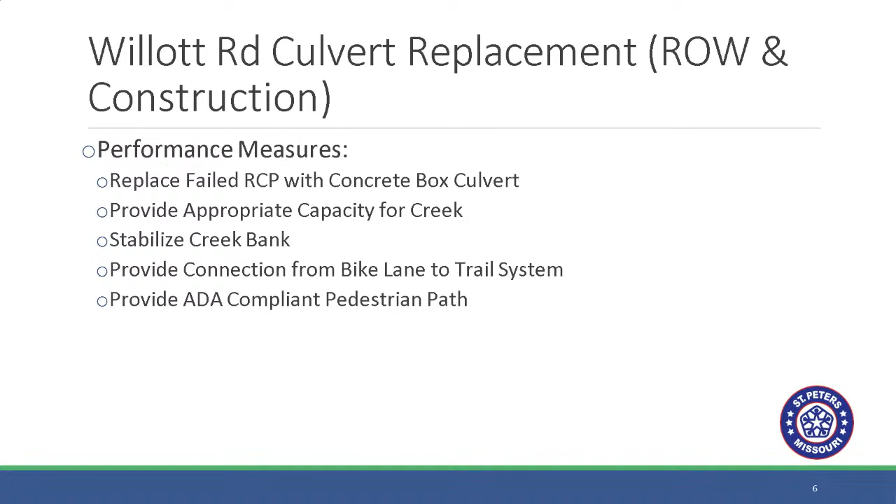We're proposing an 80-20 split for the construction and right-of-way. We're wrapping up design here this year, so we'd like to move right into right-of-way and then straight into construction right afterwards, for a total project cost of about $940,000.

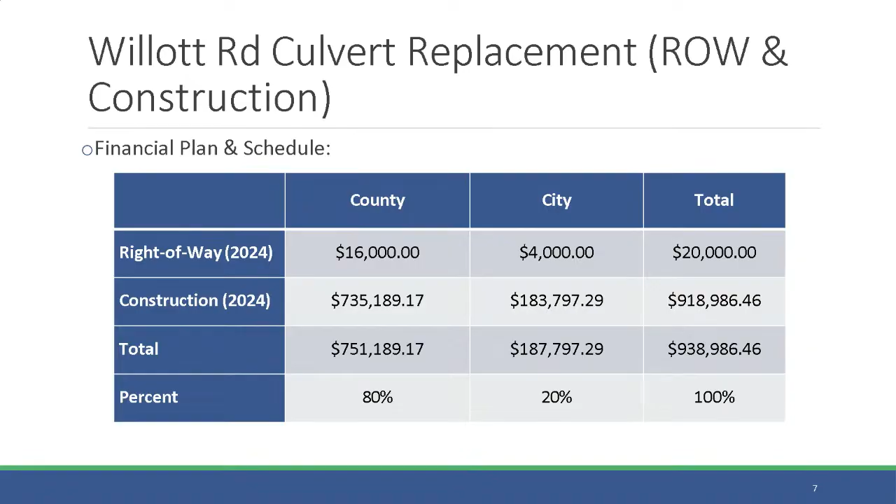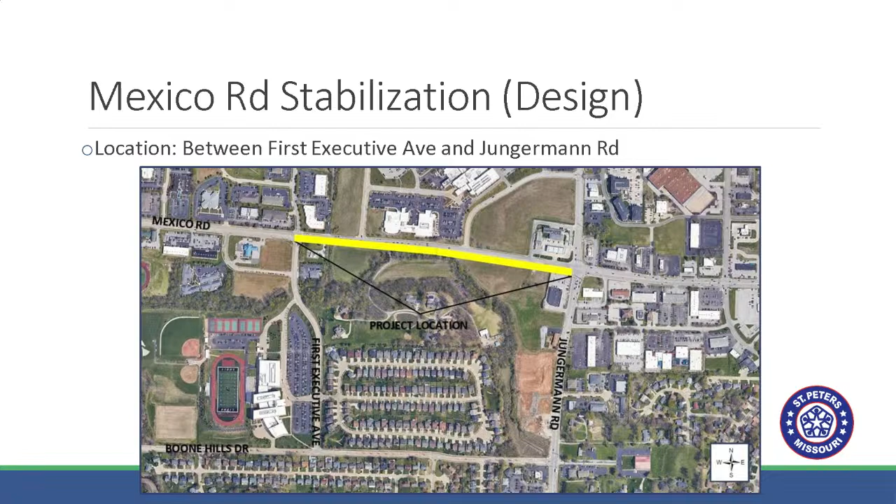Second project is the Mexico Road stabilization. This is for design only. We've applied for this previously and been unsuccessful. We've also applied for TAP funds previously and been unsuccessful. Basically, Mexico Road between First Executive Avenue and Jungermann Road, the south side of the roadway is getting pretty close to sloughing off into the creek. You can see here, there's no sidewalk or anything. We've filled it multiple times. It just continues to erode, and we're concerned that we're going to lose one of the lanes on Mexico Road, which could be really detrimental to traffic flow in St. Peters.

The project would install a wall basically down into the creek bank into the channel, put a fence on top of the wall, run sidewalk along that, and then put some guardrail along the frontage for safety purposes.

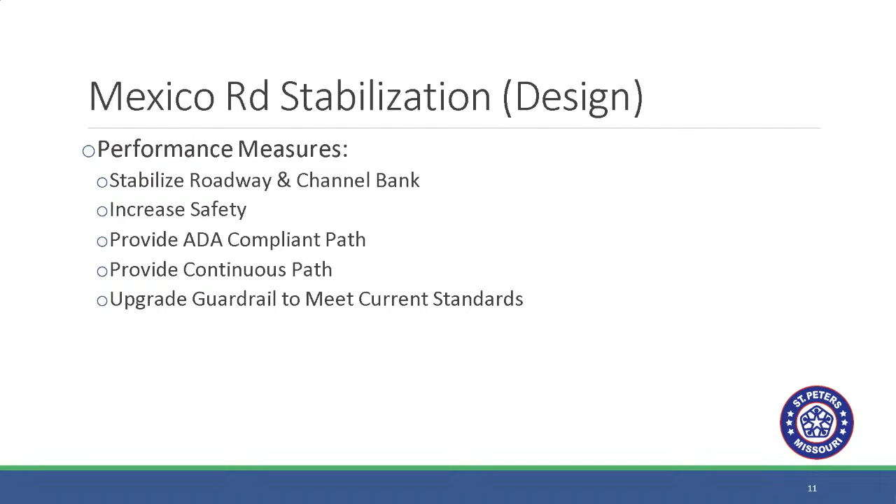Again, this is an 80-20 split for design. We're estimating about $150,000 for design.

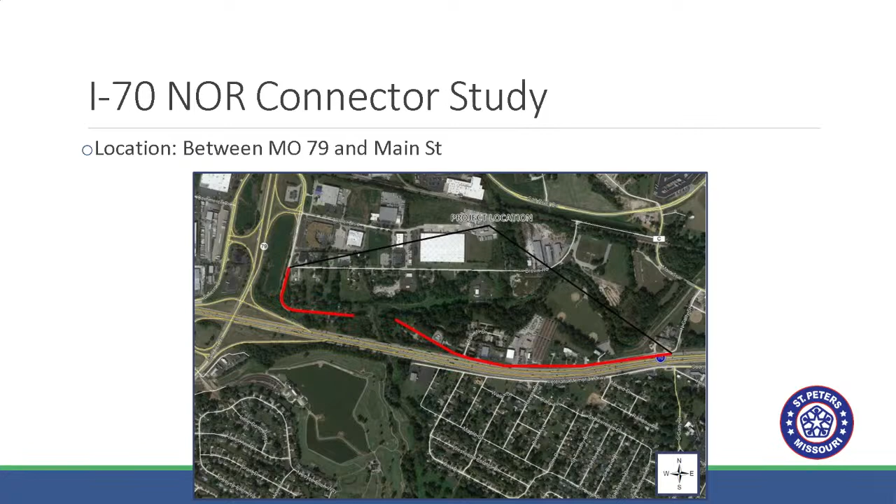Third project is the I-70 North Outer Road Connector Study between 79 and Main Street. There is currently obviously no connection between the two. At one point, there was a bridge in this area. Long time ago, that bridge was removed, way before me. So there's really no connection. If you want to go from our Main Street area over to 79, you kind of go out C and then down Salt Lick Road and around. But anybody that lives in this area has to go all the way out and around, or this area here. And so this will provide that connection there.

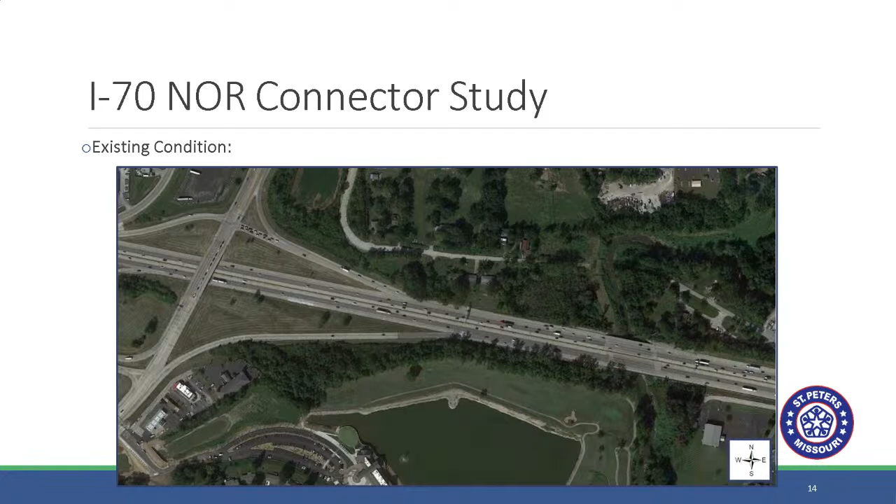Again, you can see a little closer, there was a bridge there at one point. This doesn't seem to be an area that MoDOT's really been interested in, so we'd like to pursue moving forward with this. The idea of the study is to determine the appropriate alignment. Maybe that's not the right spot to just put a bridge in, we don't know, we'd like to look into that. We want it to be the least impactful to any businesses and residences, and then of course be the most cost effective for everyone.

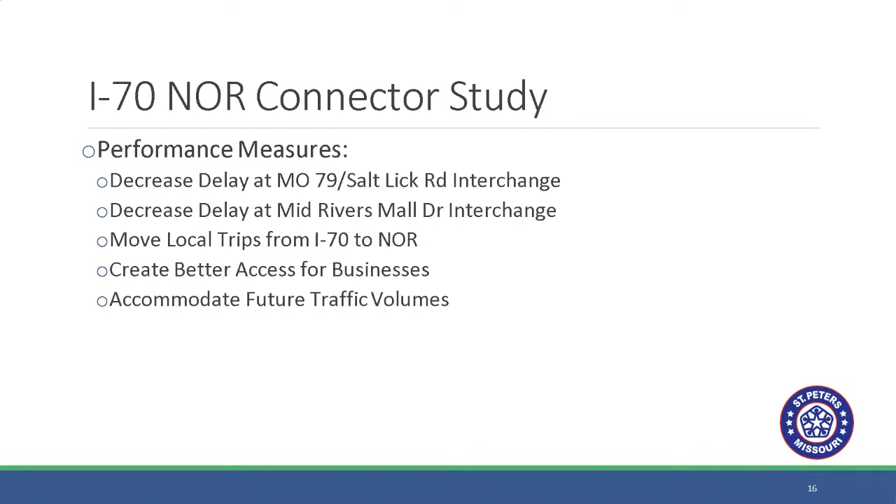We think that this will decrease delay at the 79 interchange, the Mid Rivers interchange, because it'll move some of those local trips that now have to go out to those different areas to instead use the outer road system, and create some better access for a few of the businesses over there. We would, of course, design it to accommodate any future traffic volumes. This is an 80-20 split, about a $300,000 design or study.

So the existing condition is it floods. Unfortunately, over the last 4 years, we've had 3 or 4 floods where we've had to shut down Mid Rivers Mall Drive.

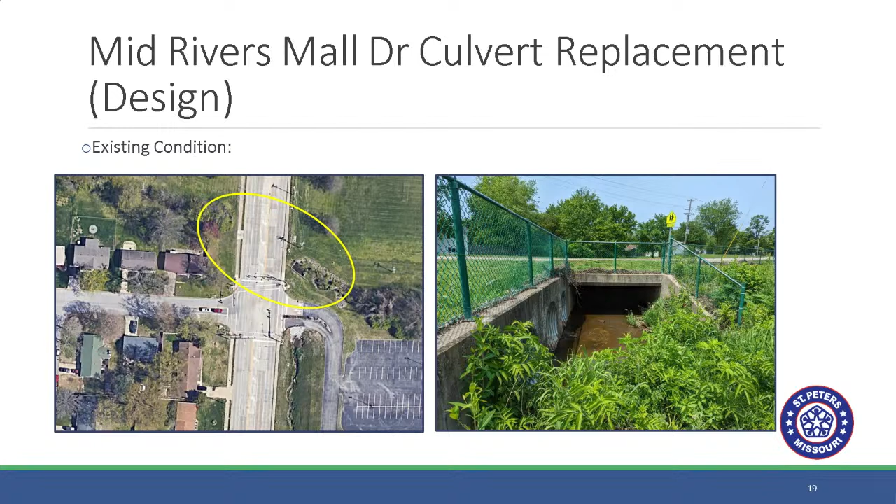So this project would design the removal and replacement of the box culvert with whatever that culvert should be, and of course remove and replace the roadway above, the sidewalk above, and then adjust any utilities and signal equipment if necessary. There are quite a lot of utilities run along the east side of Mid Rivers Mall Drive.

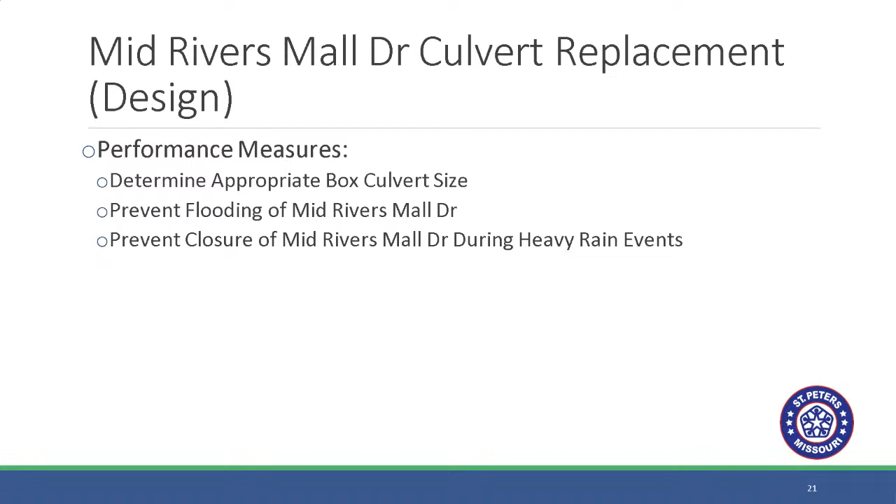Again, determine the appropriate size, prevent flooding, and prevent future closure of the roadway during these heavy rain events. This, again, is an 80-20 split. We did get an estimate from a designer to be just under $170,000 for the design of this piece.

Our last project is the Harvester Road at Queensbrooke Boulevard signal replacement project. This intersection is between 364 and McClay Road. Currently, it's a span wire signal. It was installed when 364 construction was going on to help move diverting traffic.

It's been in place for years. It's an issue. We often have to have a contractor come out and tighten the tethers because those wooden poles tend to move around quite a bit. So we'd like to get a permanent signal installed here.

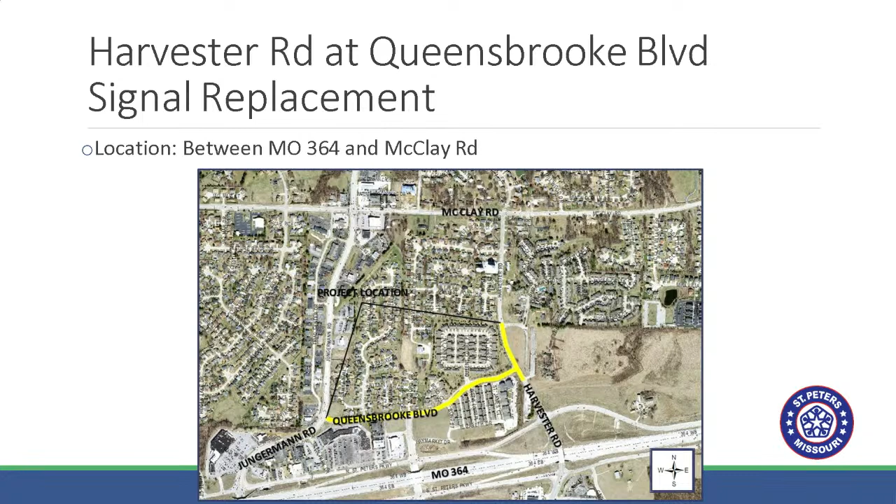Another thing to note is, as part of this project, we'd like to tie in some sidewalk here to the Sugarwood subdivision. There's currently no way to get to and from there without crossing Harvester Road at an unsignalized location that's 3 lanes wide, so it's pretty heavy traffic. This will be a huge benefit.

And like I said, provide an ADA compliant path, decrease our maintenance needs. Again, that's not something we're capable of doing, going out there and tightening those tethers, so we have to pay a contractor every time. We'll make sure to place this equipment on the east side of the road to accommodate a future fourth leg. There are plans to someday develop that property whenever an agreement can be made with that property owner.

We did receive federal funding for this project, so we got 80% federal funding for all phases. We're moving forward with the design here shortly. So we're asking for 16% county funding, and the city would foot the remaining 4%.

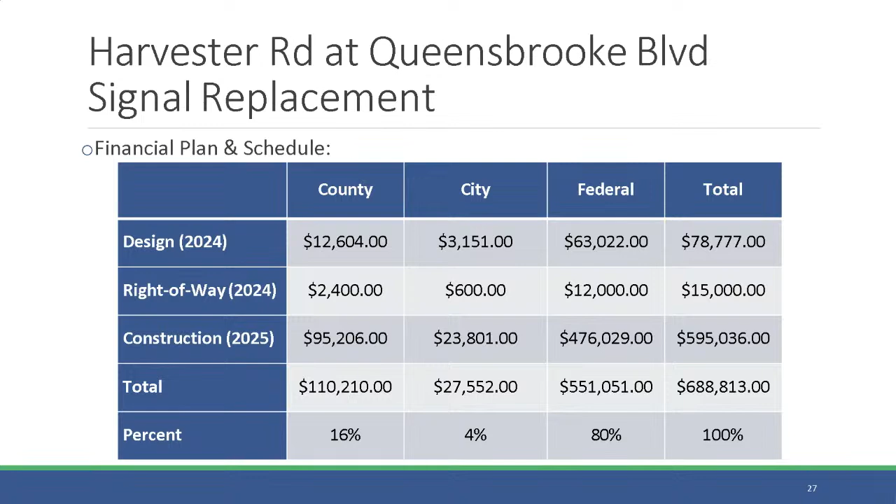And I presented them in our order of priority. So, any questions? What's the life left on the Willott culvert?

It's getting pretty bad, we have to replace that very soon. We're getting infiltration through the top, and we've patched it multiple times, but the joints are separating and it's causing all kinds of erosion around the bank. It's not just right there at the road, it continues downstream quite a bit where we need to do a lot of repairs. It's actually exposed some of our utilities downstream, it's eroded so bad.

That culvert's pretty much undersized. Yeah, absolutely. So we're going to go from two 72-inch concrete pipes to an 8 by 6 culvert pipe, so a big difference in the amount of capacity it can handle. So, does that answer your question?

I don't have an exact number. I'm sorry, two years, we got to do this project. No, I'm kidding, I don't know. Yesterday. Yes. Any questions?

On the mid-rivers, are you going to need to look downstream of that culvert? So I didn't mention this, but we actually have another project that's partially designed downstream. We're going to wrap up that design there, wrap up the design in front of the church, and then we just have this little gap in between that we need to hit.